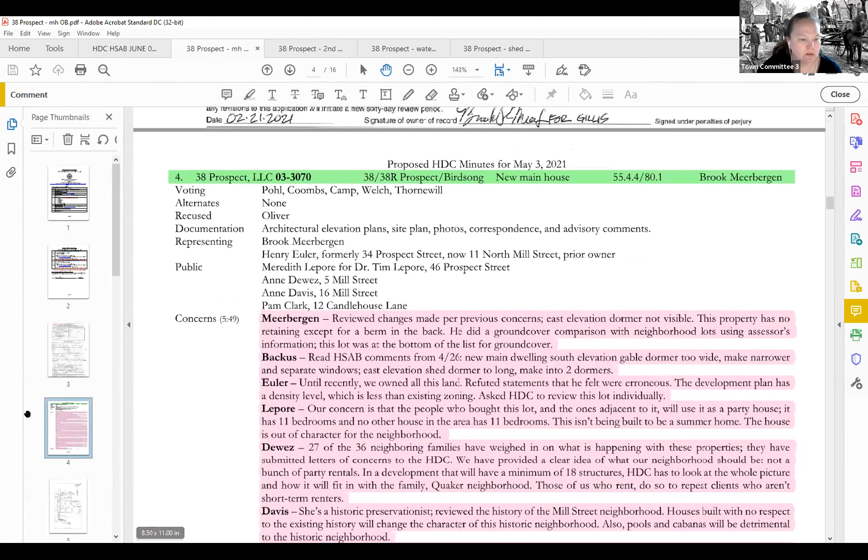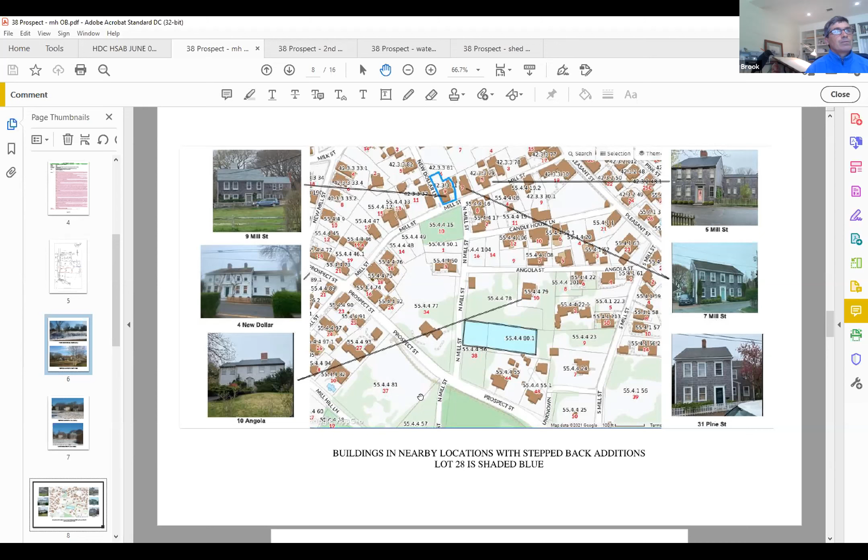Do you want to say anything? I know. Let's see, which one are we on? Are we on the main house? Main house, yeah. Can we just scroll down through the? Yeah, we've already seen all that. Yeah, so.

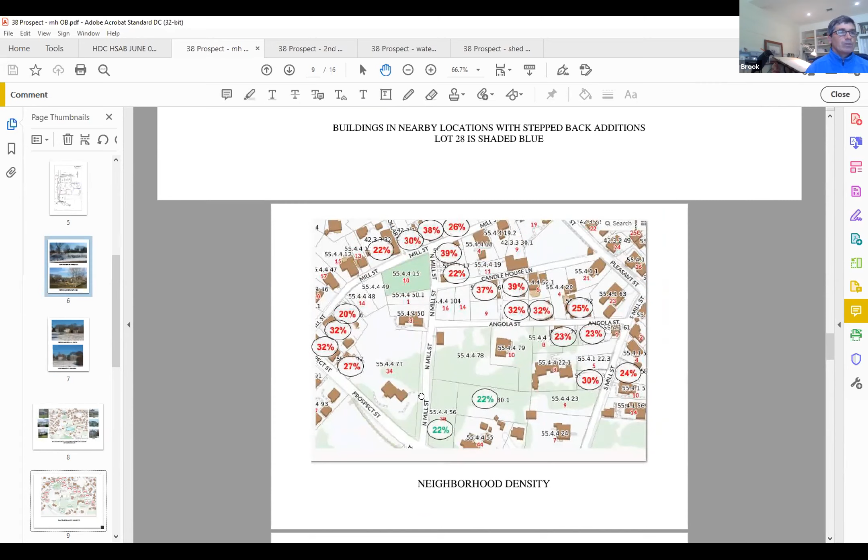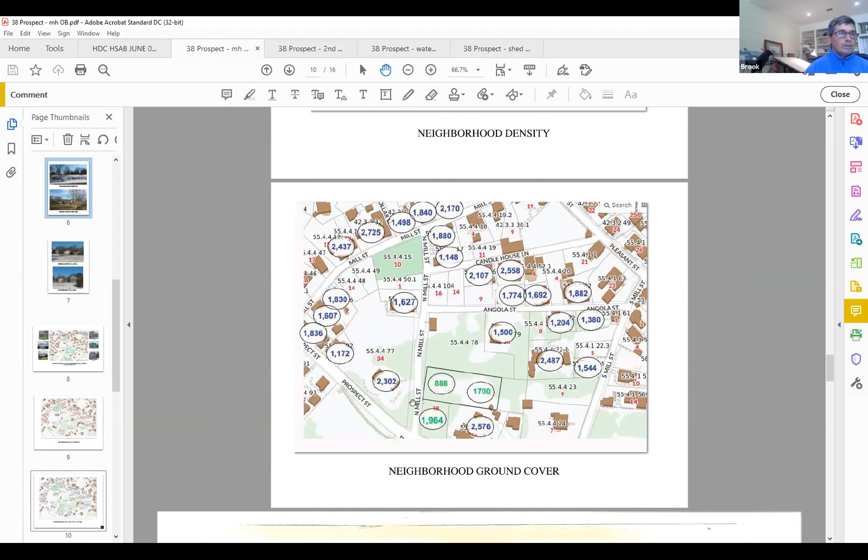You know, at this point it's hard not to look around and say there's so many other examples of what is being proposed here in the neighborhood, that it kind of defies reasonability that we're getting as much pushback as we are on the house. So I'm hoping that the minor revisions that I've made will help appease. As you see, these are the densities and the square footages, and they're all well within the realm of what is around this parcel, on a larger lot.

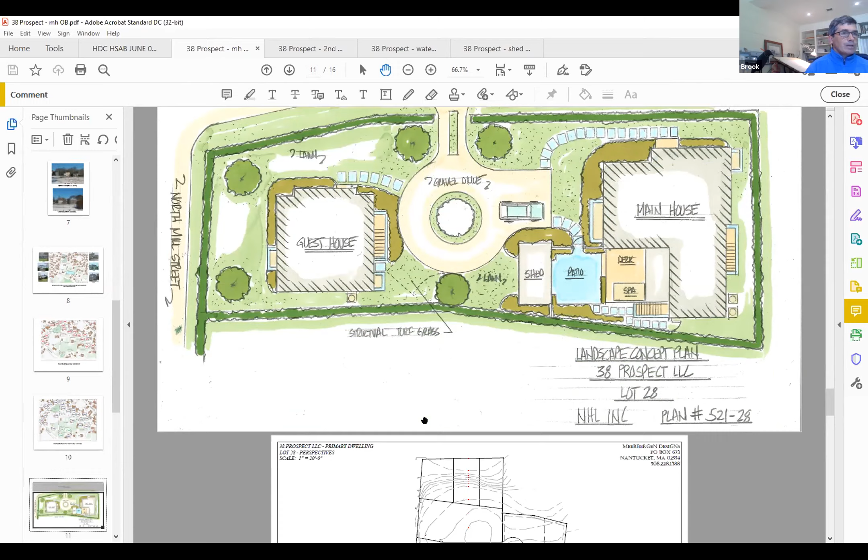So anyway, I included a landscape plan that I think is definitely artistically a little bit more appealing than the CAD site plan that I had provided before. So hopefully that helps paint a better picture. And I think, let's see if we keep going.

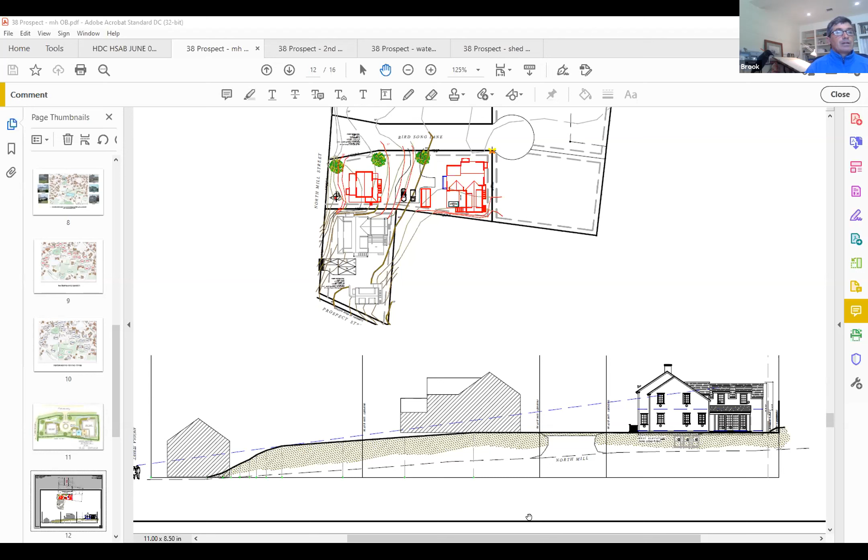I think one of the things that had been requested at the last HDC meeting was that the 60-foot topo line be maintained. So what I did is I ran the 61 and the 62 behind the house, and you can see there's just like a berming effect on the right-hand side. What you see on the bottom is a topo through the entire parcel, all those parcels from Angola all the way up to this house.

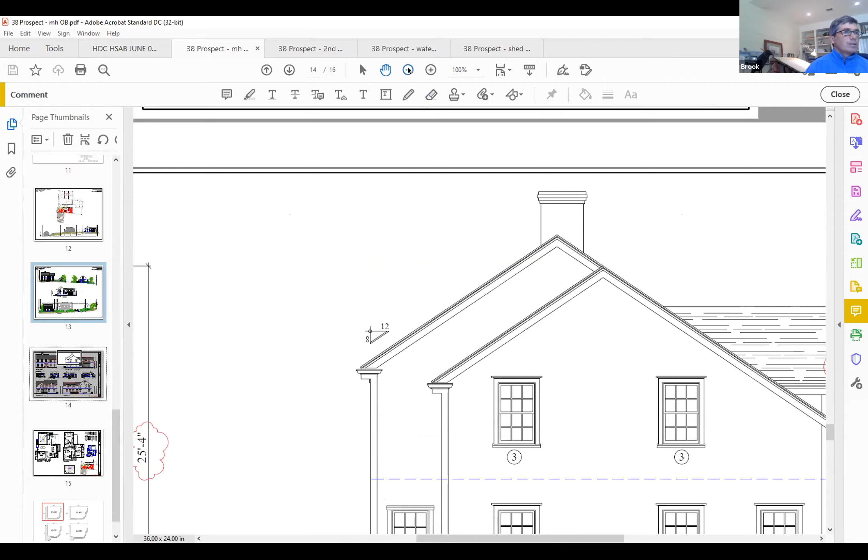And again, I think that it should be fairly evident. Yeah, I guess, again, this should be all self-explanatory. And then the next page, you'll see the changes that I made for the HDC.

You'll see on the north elevation, the height was dropped on both the left and the right. There is a plate height shift. This is now a mud sill, before it wasn't. And the dormers on the west elevation were split, where before it was one dormer. The same is true for the east elevation. Again, that was an HDC request.

Moved the stair around the back side, which is on the east side now. It was on the west side, the stairs to the basement. And made the gable dormer a little bit smaller, pulled in the cheek wall a little bit, dropped that, pushed the windows apart to give it a little bit more balance.

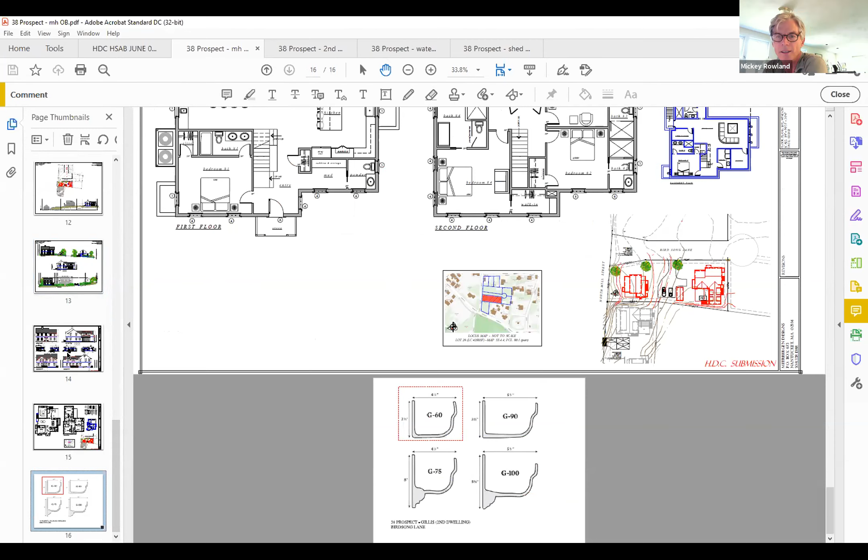And instead of 3/3s, which Diane Coombs didn't like, they are now 6/6s in the bedroom. So I think, oh, and I might add that what you see is my 24/36 format, so everything fits on one page. I mean, I think that kind of underscores just how small this building is. And I guess that's it. Thank you.

Okay, thank you, Brook. I think one question I have, the east, is it the east elevation, west elevation? How visible is that rear part of the west elevation? I think without the second dwelling there, I think it would be somewhat visible. There is the shed that blocks that view as well. So if you go back to the site plan, yep, up one more, yep.

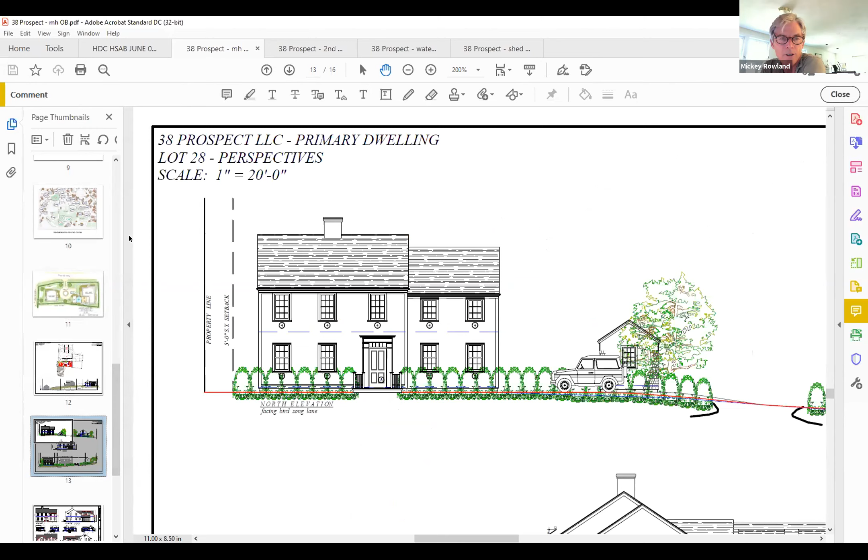And you'll see that there's that shed that acts to block that view. Maybe you'll catch a glimpse from Birdsong Lane at an angle and catch part of that back porch. But I think that shed helps, and then that second dwelling also helps too, assuming that gets passed in its form.

What about looking, Holly, could you go back to that? Rick, what about looking like from Prospect? Say you're on the bike path on Prospect, and you look between the barn, the shed, and the neighboring building, looking through at an angle. Will you see like the rear dormer? I can't tell by the topos if that's all wooded?

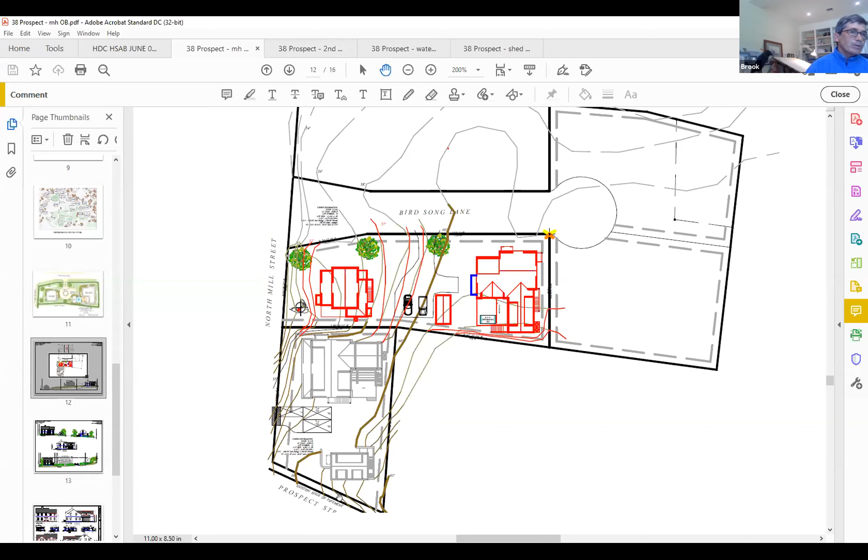Is it really? Yeah, so that's Fraker's property, and Fraker's property sits up above the bike path. So I think you're going to probably see next to nothing. I mean, you'll probably see the roof of the building, but I don't think you'll see that first floor for sure, because I think it's about 8 feet below where the... if you zoom in, you'll see this.

There's a 65, right? Topo line, and keep going down. Yeah, I'm more concerned about the second floor dormers, to be honest with you. That gable dormer. Yeah, and the others, they're pretty... well, if you don't like it, then you don't like it. I don't think it's going to be as visible, just because you've got Fraker's building there, and you've got the new construction that's going on lot 29.

So plus we got the lot itself that Fraker's is on is up about 7 to 8 feet, and the Prospect bike path is below Fraker's. Like if you ride by there, you're looking up at Fraker's front door. Okay, thanks, Rick. Thank you.

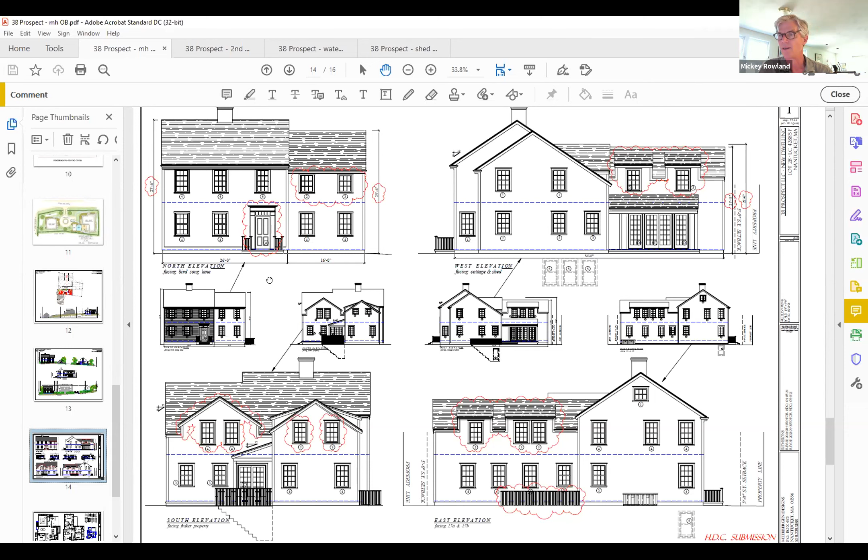Yep, I agree, I think it would look better. And dare I actually say this, because I work in a house that has 12 over 12 and 9 over 9 and what have you, you could actually do a mix. The main part of the house could just be 12 over 12s and then the rest of it could be 9 over 9s.

Give it a little look and see how it looks. All right, any other comments on this house, the main house?

Moving on to the second dwelling.

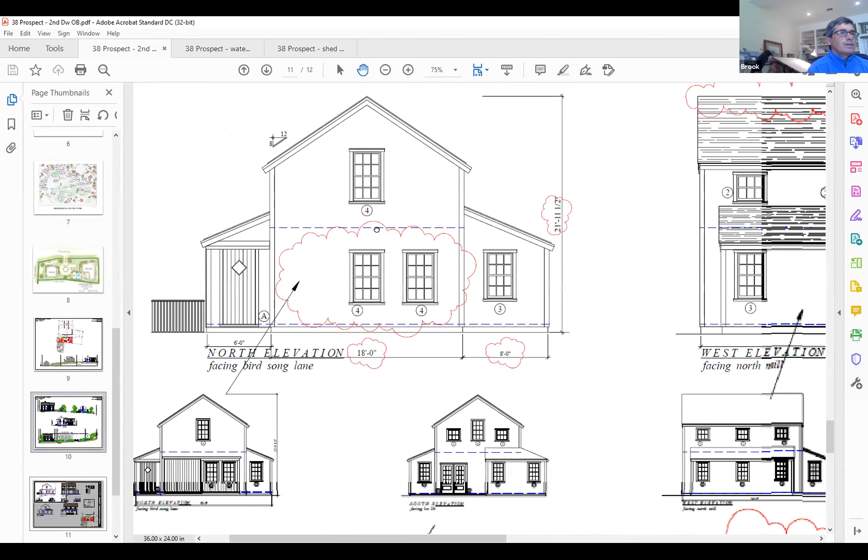So for this one, the stylized garage entry was abandoned. The building was brought down—I can't remember how much, but it's below 22 feet now. The front windows, everything was simplified, I think, in that respect.

Yeah, most of these were just HDC concerns. This is a simple building. I think it could have been a barn that was added to over time. So I've done, I think, what was asked in that respect.

Angus? I like the notion of it being a barn that was then changed over to a living space with stuff added on to it, and that's what it looks like. I think it works—it works with the house. I appreciate the height going down.

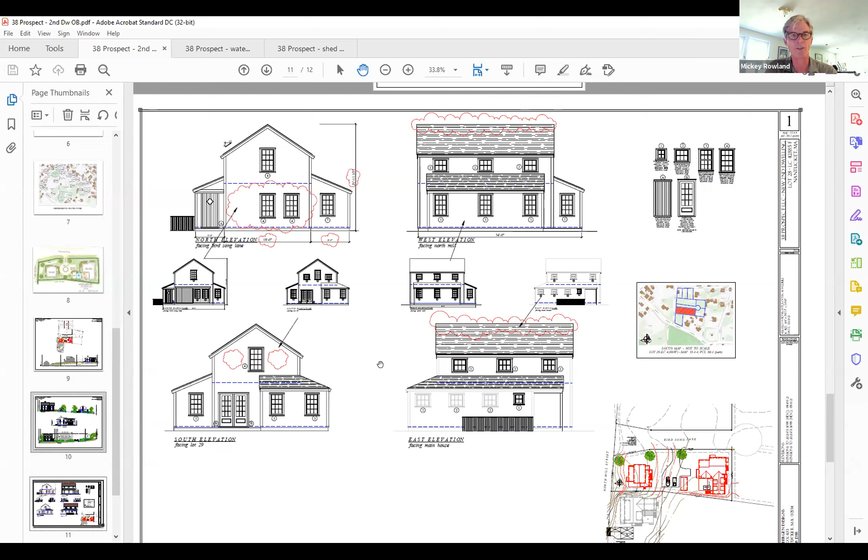Okay, I'm going to say something similar to what I said on the last one. What about 12 over 12 windows? I think that might also kind of give it that barny old feel. Yeah, I'm game. I'd be happy with that recommendation.

And the other one—that north elevation where there's sort of that blank spot to the left. I know you've got a stair in that corner. What if you move those two windows, just sort of center them within that wall? Can you squeeze them in there and still make the stair work?

No—can we do it? What about if you just did a 3 over 3? Because if it was a barn, they might have had windows randomly stuck in places at different times. Yeah, actually Holly, would you mind scrolling to my floor plan so I can answer that question?

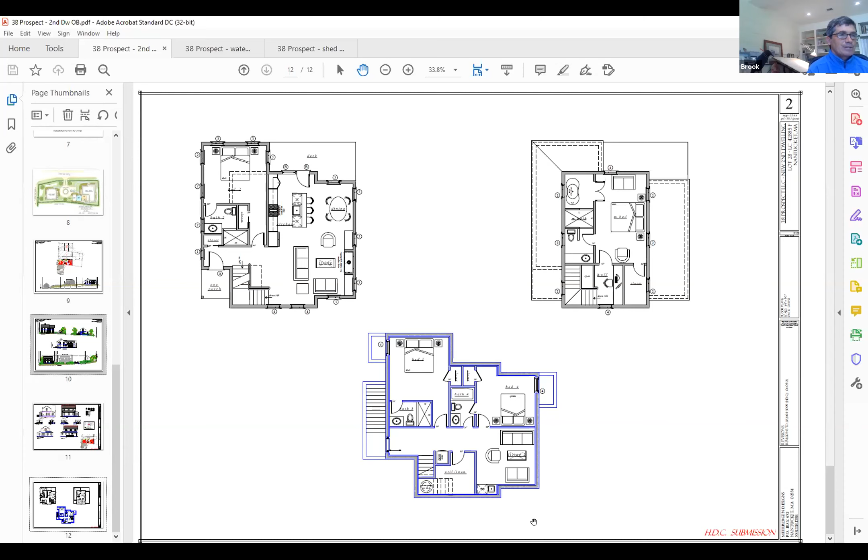Yeah, I think it might be possible to have like a little window there, either a 3 over 3, or we could do like a little 4-light window, kind of like what's in the powder room. Yeah, it could even sit on that landing part of the stairs.

And you know, I'm definitely interested in that. Just the way things have been going at the HDC, I have no idea what's going to fly, but yeah, I definitely would entertain that.

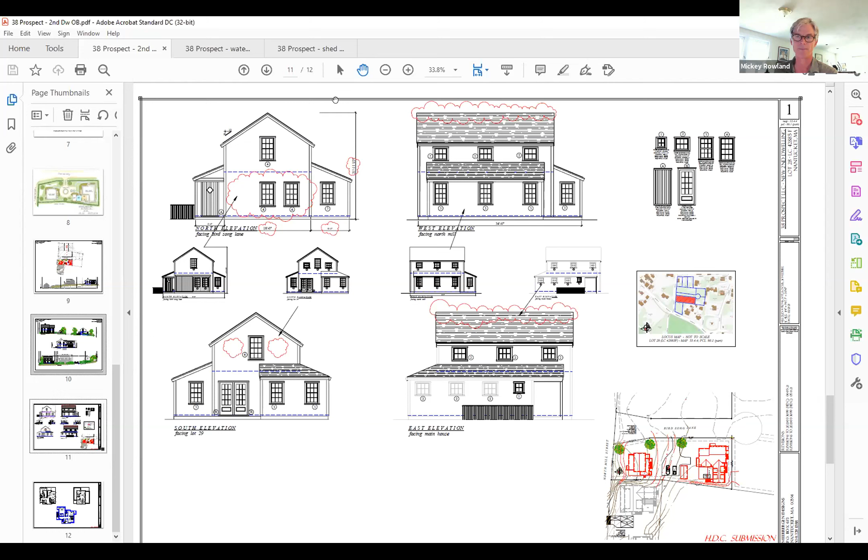So if you do end up going to 12 over 12s, then it would be more like a 9-light, which would have that more barn type of quality too. So I think that's a good suggestion, Jason.

All right, on to the shed.

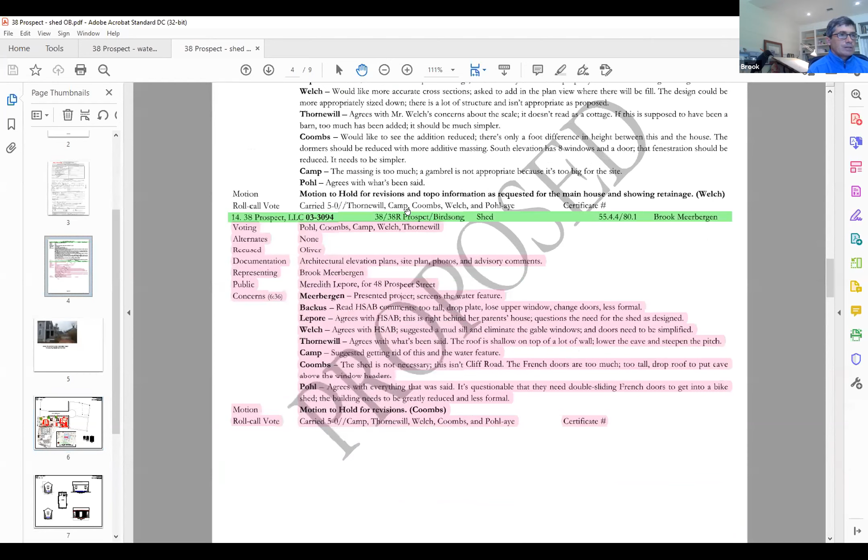Oh, that's old. Oh, okay. What happened is this has now been tracking with the application, and so what you're looking at is an old site plan, the old water feature situation.

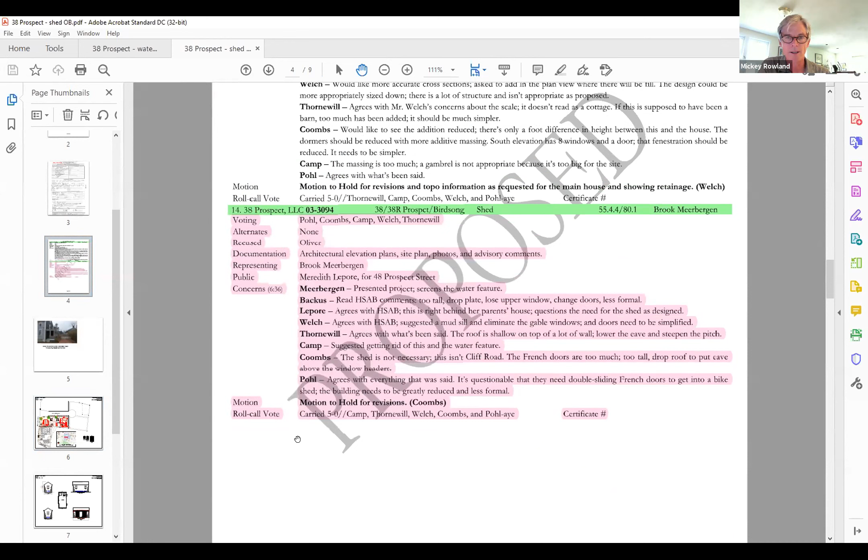But the shed, I think at the last HDC meeting, almost everybody was okay with it. So it's just running with the rest of the plans.

There was a comment from someone that maybe it felt a little long, and that's my only comment, could it be shortened a little bit? I'm open to that. I think its length certainly helps obscure the west elevation of the house, but I think knocking 2 feet off of it probably would maybe help the design and wouldn't necessarily hurt visibility.

Angus, do you need to have double hungs in this? Being a shed, it brings me back to the idea of the barn and outbuilding, that there could be, especially on that west elevation, maybe 3 nine-light fixed or awning or hopper windows or something. It seems kind of long to have that blank space in the middle, but it's a shed. I don't see any reason to have 2 double hung windows there.

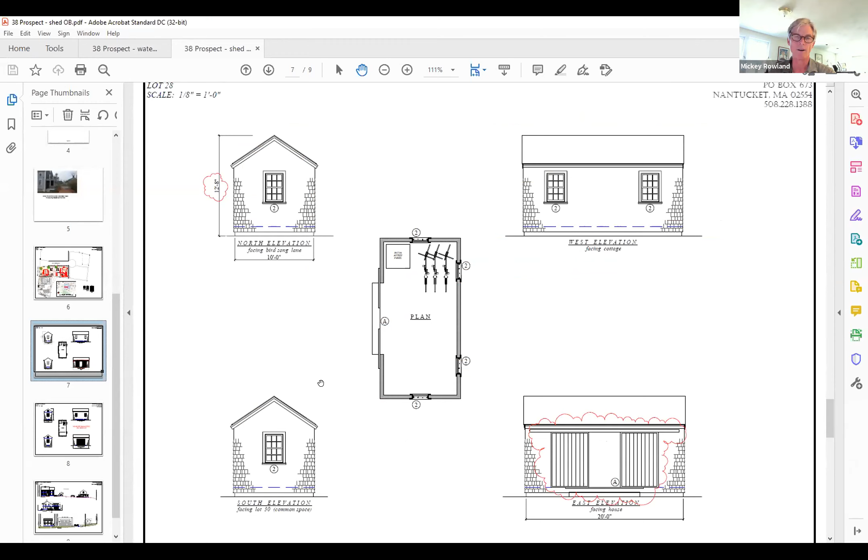So maybe the gables were double hung, and that west elevation could have a couple or like 3 smaller windows. Yeah, I'm amenable.

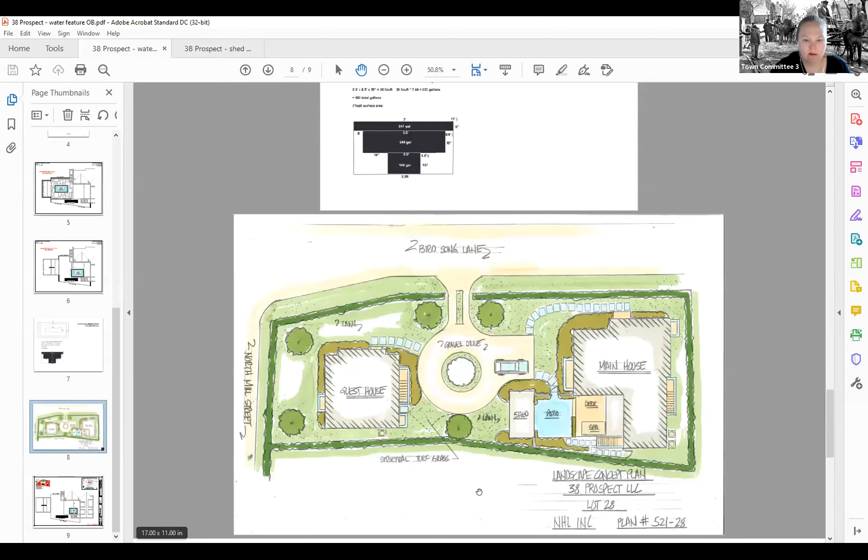Jason, did you have any comments? Okay. And then on to the really fun one, the water feature. You're drawing a crowd. This was just to track, right? Well, to track, yeah, the shed. Oh, okay. Your water feature was to track, right?

Well, we've changed some things about it. Yeah, if you keep going down. So I think the shed was supposed to track, the water feature was revisions, so that might have gotten input backwards, maybe. There was a whole lot going on at the meeting. But anyway, the water feature has been made much smaller, and it has been tucked further back behind the building.

And it's in the deck, so it's part of the part of, it's not going to be sticking out anywhere where it might be visible. Is that underneath the porch roof, like half? Partially, yes.

Okay, Jason? I'd rather it just go away. I'm not a fan of it in the deck either. I mean, I'm not a fan of them at all, but I just think in the deck is a little unusual too for Nantucket. I know we saw one on Westchester, I think. There might be one other maybe on Hussey, but I just don't think it's appropriate. But that's all I have to say.

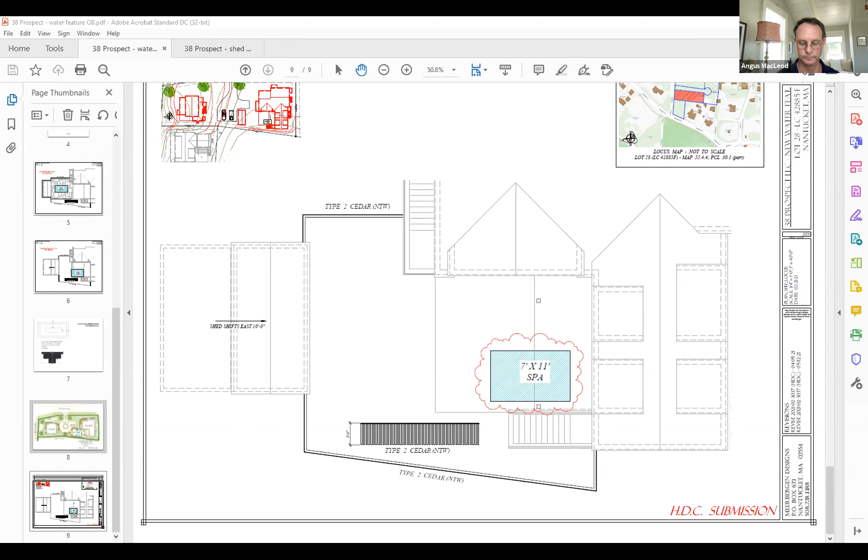A water feature like a koi pond or a little thing like that, I think makes a lot more sense out in the patio than a water feature that's partially under a porch. So I like the reduction in size, but I would prefer to see it more out. I guess the reason it went behind was just to screen it from view, but I have to say, if it were to exist, I would prefer it further out.

Okay, is there anybody else in the public that wants to speak to this particular application? I see a few other names. So maybe not. Okay.

I think you bring up a point about this being not right downtown, on the outskirts on the edge of the OHD, and that's got some merit to it. But in general, I think many of us are still opposed to these kinds of things downtown in the OHD, and this is part of the OHD. So I'm going to just make one comment: pools and oversized water features have an adverse effect on the character of any dense neighborhood due to nighttime reflected light and accentuated sound. These features are especially not appropriate in the OHD. Visibility is one thing, I'm trying to dance around that because I doubt it's visible, but I still don't feel they're appropriate down in the OHD.

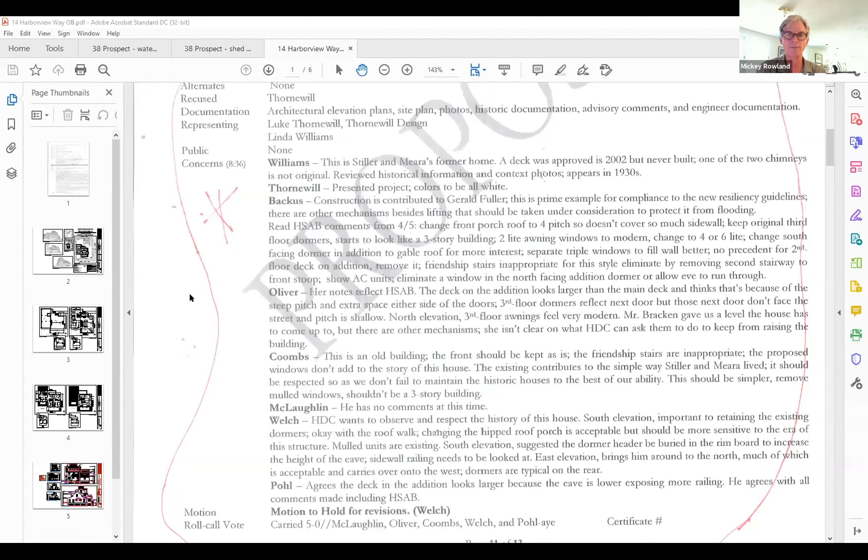So I think unless there's any other comments, we can probably just move on. So on to the next agenda item, 14 Harborview Way.

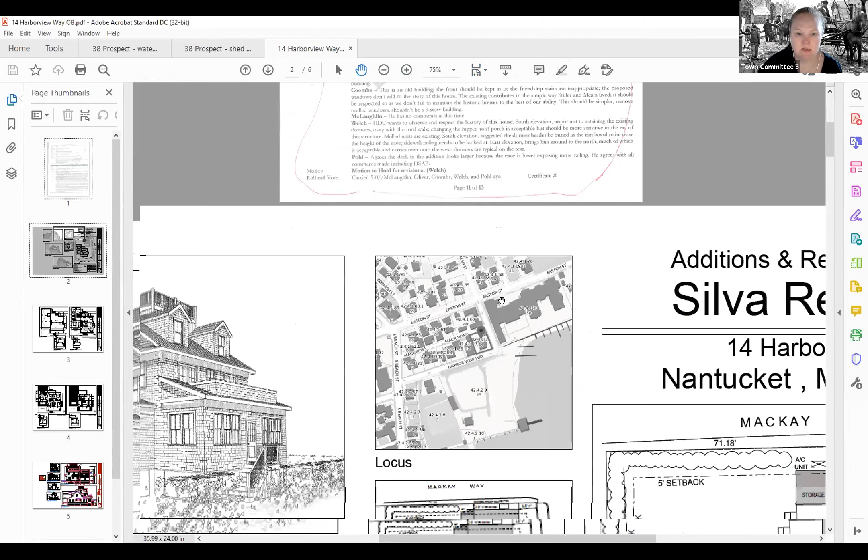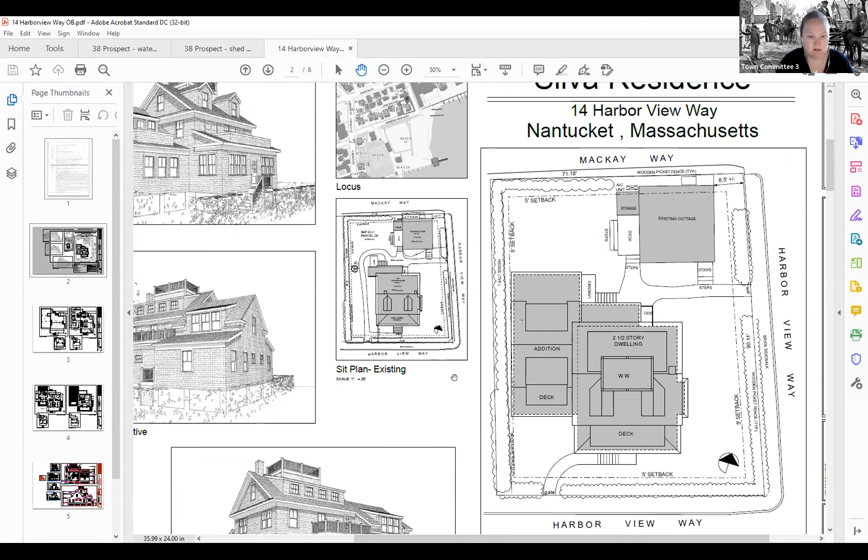So of course I read all the comments, as you can see here. And the biggest thing that I did bring up to them was the fact that this structure is historic, and it's one of the first that's really going to be, should be an example of what could be done for a historic structure being elevated to meet FEMA flood standards. So I'm not too sure what they provided, but here we go.

I don't see Luke or Carrie here, so is there anybody else in the public on this application? Nope.

All right, I've got a few comments, but I'm going to let you guys go first. Brooke, do you have any comments on this one?

You know, it doesn't look markedly different than before. I think it would be helpful if Luke or Carrie were here to kind of summarize some of these things.

The access point on the south elevation from the second floor, that's still a concern. We've got two decks facing outwards. Maybe there are other buildings on the street, the other ones have the same situation where they've got two decks, a deck for each bedroom.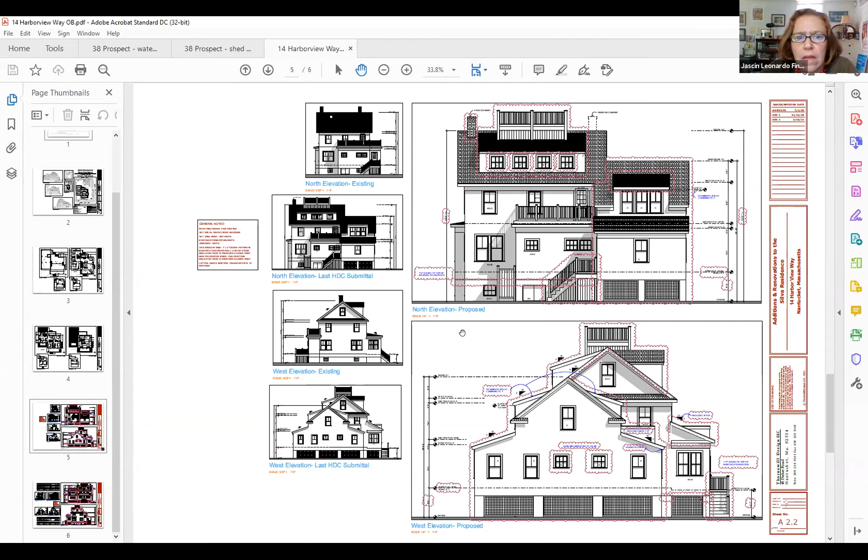Going back to the south, the front door, I know it's existing, but it's a pretty ordinary door. I think this is going to now look like the front door of the house, and they could make it a little bit more attractive, enhance the casing, and maybe go to a different style door. And those are my comments. Anybody else want to add to that or comment?

Jascin? I just also think on the west elevation, the way it looks like dormer on top of dormer on top of dormer, it's like gigantic steps. It's just strange looking to me.

Is this the elevation you're talking about? Yeah, I see what you're saying. It's just too much. You don't even know what the original house looked like - it's just been eaten. The middle dormer is pushed back further so they're not one on top of the other.

Do you see the perspective though? Actually, it's not a dormer on the bottom, it's over the door. I don't know, I think it overly emphasizes the height as well. What is the height? The overall height would be 36.

Let me also point out that they'll be required to go to the zoning board of appeals for that height variance.

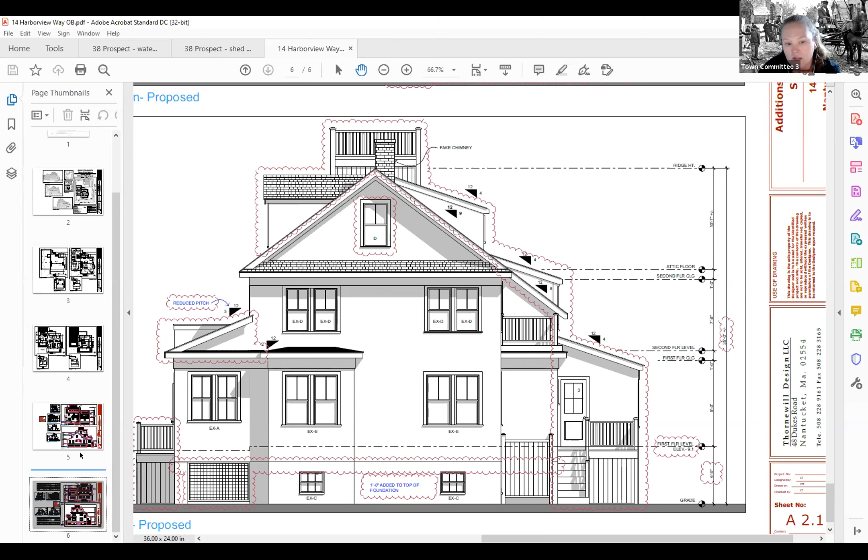Jascin, your comment in the beginning really hit the nail on the head for me. It really obliterates this 1930s historic structure from what it is now. It's really even altering the streetscape. I do understand the applicants provided in their previous submittal a lot of photos of the existing streetscape, but from my perspective that needs to be included with the proposed renderings to really see how it fits in with these other Harborview houses that have been altered over the years. This one is being raised significantly high, but I really do think it's the addition that just wipes out the significance of this 1930s structure.

And the roof walk, the addition of that deck, and the center window stuck in the middle - it's out of scale. 1930s to what? I'm sorry, I just don't have the proper terms to express it. I'm disappointed.

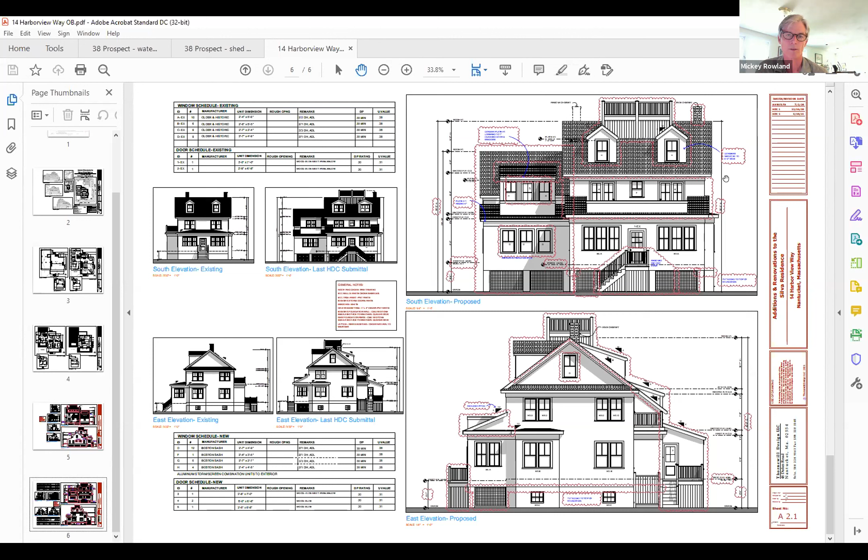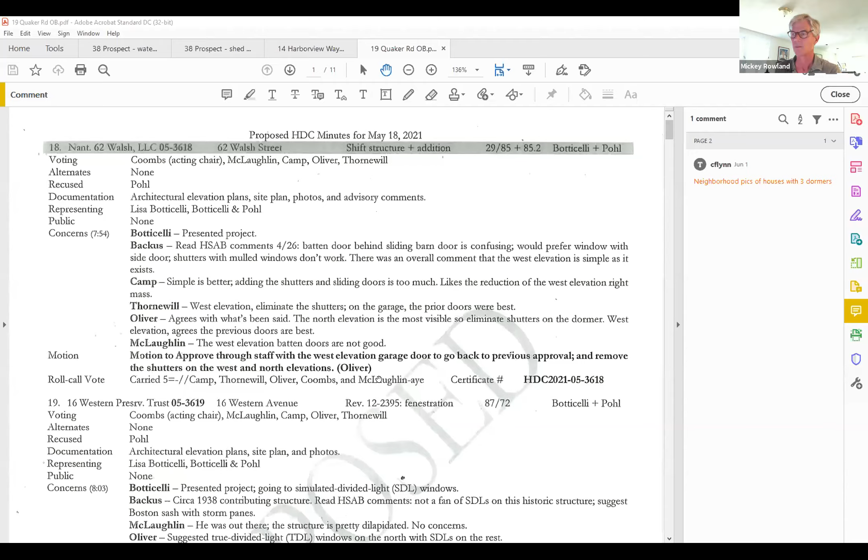So I'm adding the note that these additions essentially obliterate this 1930s structure - too much change and expansion. I think that's good enough. Let's go on.

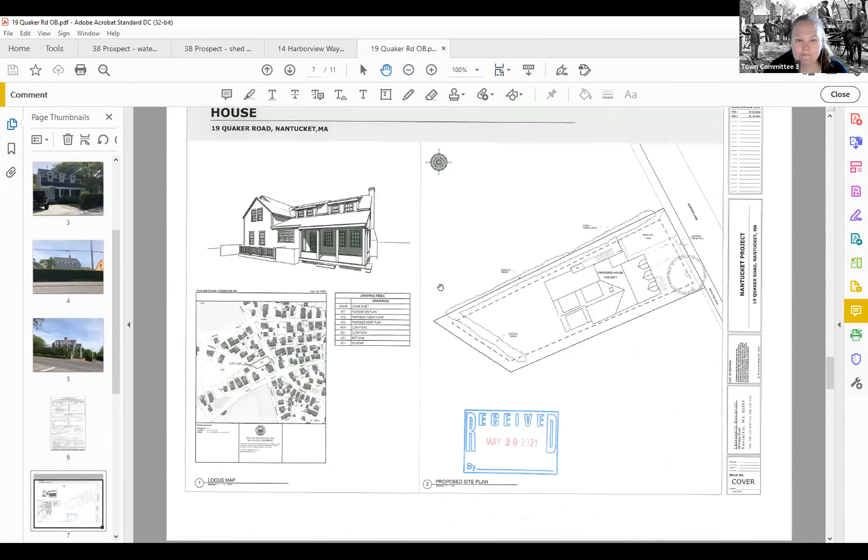So the next one is 19 Quaker Road. Examples of 3 dormers on the roof.

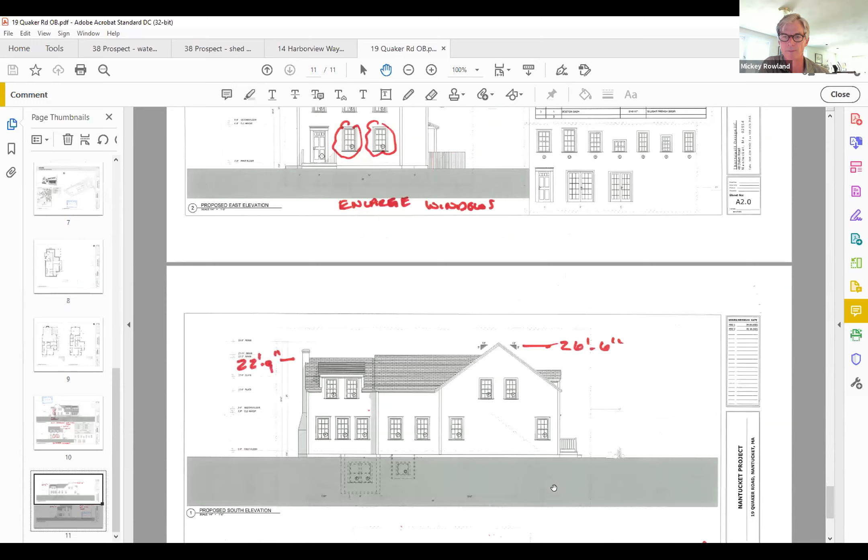So they've made some changes, mostly windows, not too much in the massing from what I can tell. Any comments from you guys? Brooke? Let's see, hang on a second.

My general impressions are that this is a simple building. Let's see, where are we? Okay, so they bought the back of Aloisi's lot, I guess - I think it's maybe even a second dwelling, a second lot. I think they subdivided it. Yeah, all right.

I think it might appear long and large from the sides, but the narrowness of the lot and its proximity to a much larger house to the south, and some density to the north, obscures that concern a bit for me. In terms of the window changes, I guess those must have been things the HDC had requested - we did also, so that works. The height 26.6, I think that's probably in keeping with what's around there - the house right next to him on the corner of Quaker and Milk is definitely bigger than that. So yeah, I actually have no concerns with this building. It's simple, it works, and we're really never going to see the length of it.

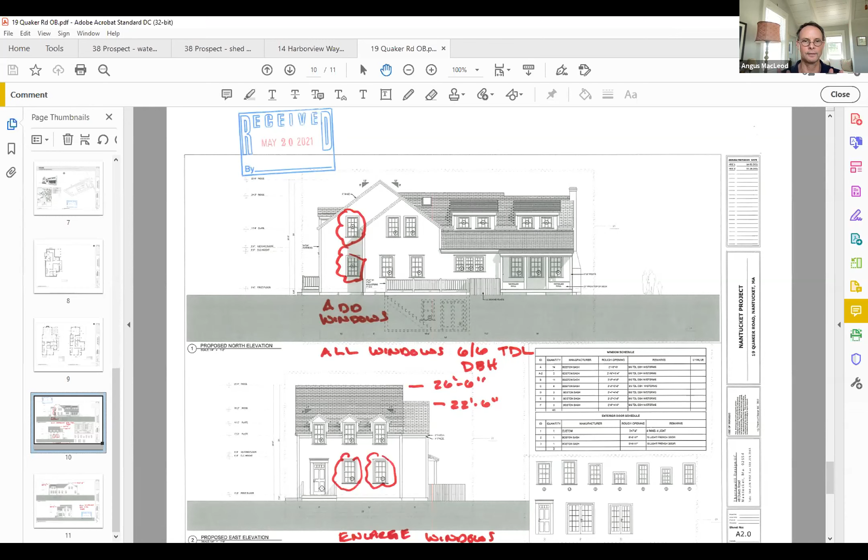I appreciate the first floor windows getting larger, but the second floor windows on that street facade, there's something tediously small about them, and I can't quite place whether it's because there's so much roof above them, or that they really are just small. It's like it's a different scale from the first floor to the second floor.

I don't know whether the dormers need to get bigger, or the roof needs to get smaller, or both, but they seem small for the height of the roof behind them.

That's pretty obvious in the front, but if you look at the profile too, you get this little dormer and then the long roof that comes out above it. Those windows on the dormer are 2 feet 8 inches wide by 4 feet 8 inches tall, so they're not small windows, which is odd because they look it. So it makes you wonder what the scale of the building really is.

Does anybody else notice that it's almost as if you would typically have either thicker trim or a course of shingles on either side? This looks odd to me.

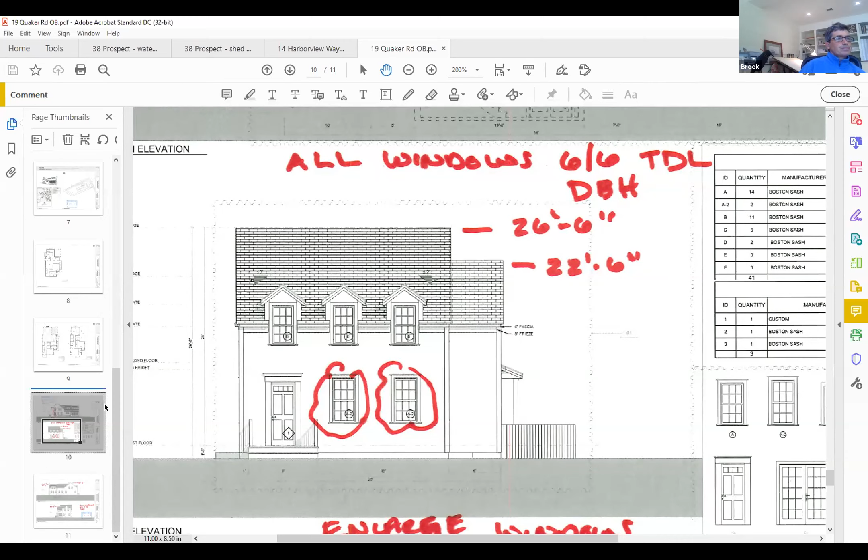Is that because it's sunk in? It's a little tight, and we're often trying to get people to go in the other direction. There's usually too much space on the side of the windows, so I hate to comment too much about that here, but I think you're right. The casing right up against the corner board - do we think that'll look better with a little bit more space? Maybe a shingle band around the whole window?

Well, let's go back to those photos. Let's see what was acceptable.

He doesn't want it. Cottage corners - I kind of like the windows sort of tight in the dormers, not...

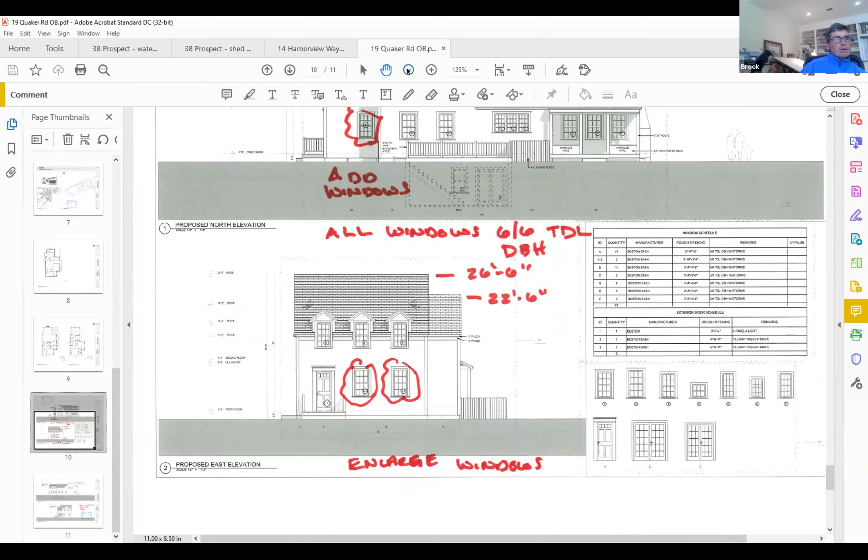So maybe we just leave it at that and just say, just try to get a few inches of shingle between the casing and the corner board. Does that work?

Yeah, I mean, I like it more or less as is. I do think that the dormers could maybe come up a little bit into the roof line, as opposed to being a quarter of it. As Angus said, it's almost more like it's closer to a third or even a half in those photos.

Maybe that's a roof pitch change, like an 8.5:12 would help that. So, yeah, I think actually even just going to an 8 pitch - I think that's not unusual.

So these are 6/6 windows. It's not a Victorian - 9 isn't that steep, but I think 8 might help the concern we're talking about. And maybe raise it so that the lock rail or the meeting rail of the window is more at the break of the dormer to the shingle, or just something to bring it up some. I mean, those are pretty large windows for second floor bedroom windows - it's just because of the roof and the scale of everything around it that they look small.

Well, to me, they look like they're in the right place relative to the eave line. We always want them lining with the meeting rail, which they do. So I'm not sure I'd want to suggest raising them any. That might make them a little too top heavy.

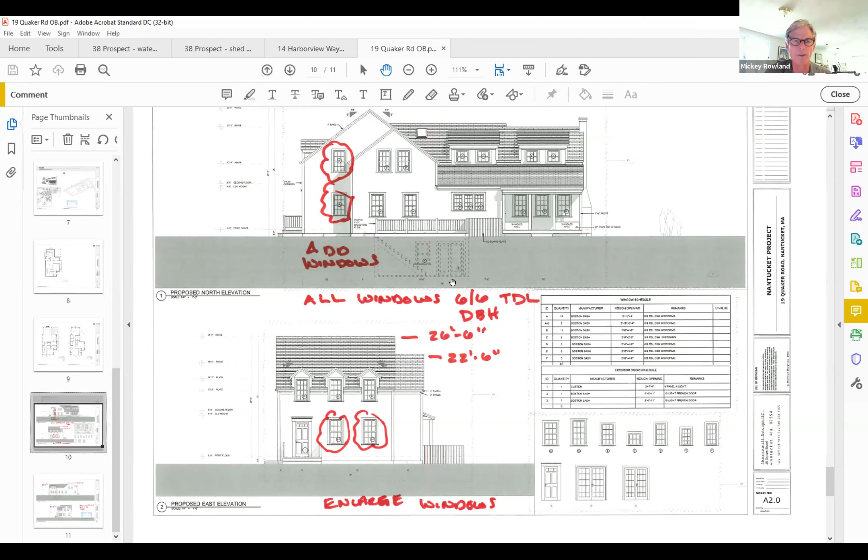Maybe just dropping the pitch will help. I think that's a good idea. I think that'll eliminate some of that roof plane, pull them up, or make them fit into that roof plane a little bit better. I doubt they'll lose much in terms of the program floor area.

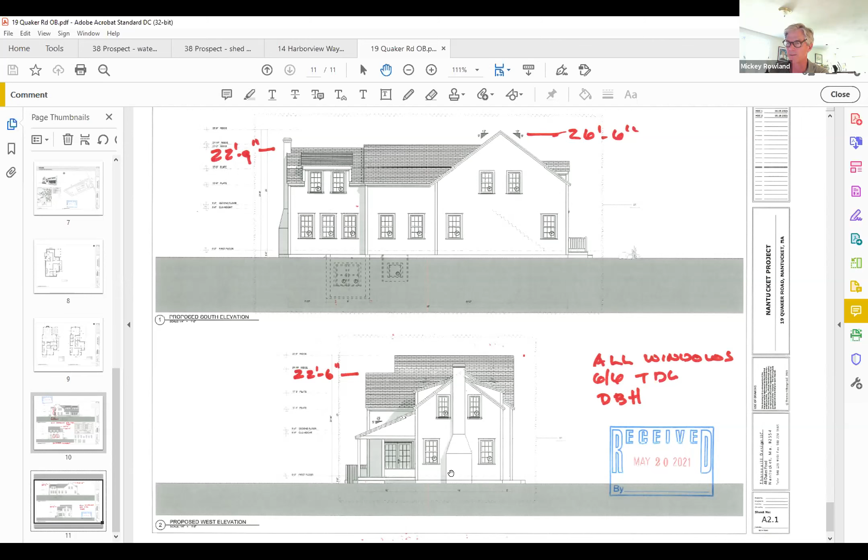My other concerns were, and it's not so evident on this view, but on the south elevation - there we go. The rear wings, the plate's the same height as the main roof mass. I think that the plate for all the rear appendages and the side one, for that matter, should be dropped lower. Make some step there. We're up too high.

And then on that, there's now it's the west elevation below. That's a lot of, it's a 5 pitch on that porch roof, I believe. Is that a 5? You read that? Yeah, that's a 5 pitch.

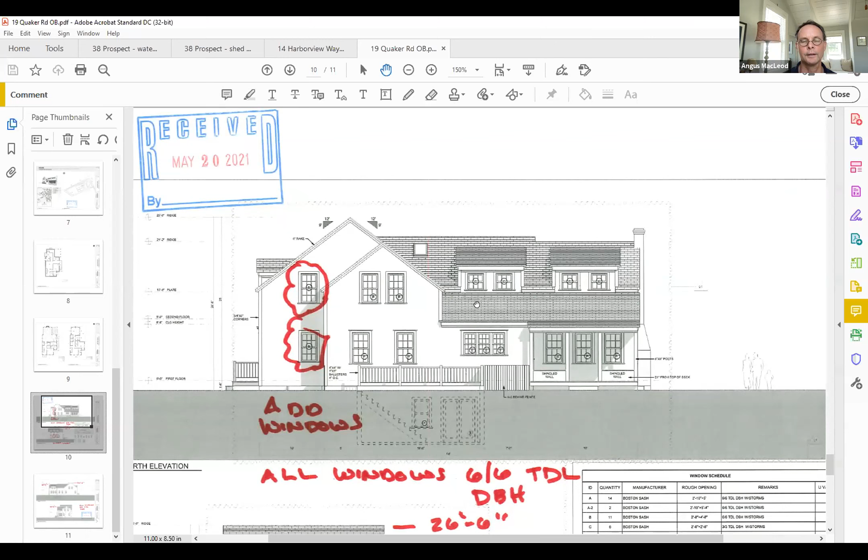And then now if you go to the north elevation - there you go. It's just a lot of roof on the north side. All that, it's one roof plane. I'm not sure I mind the depth of the porch, but it's just a lot of roof. I think if they went to a 4 pitch on that porch roof, it would just eliminate a lot of asphalt. So, those are my comments.

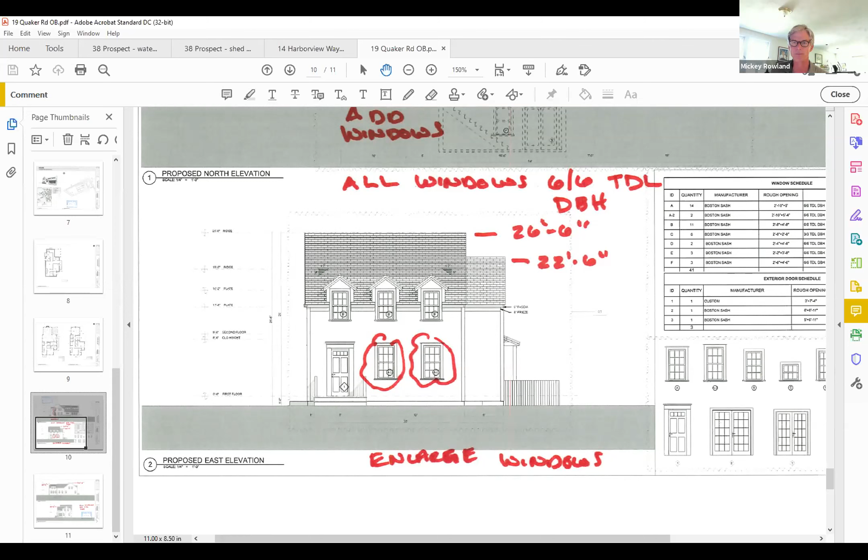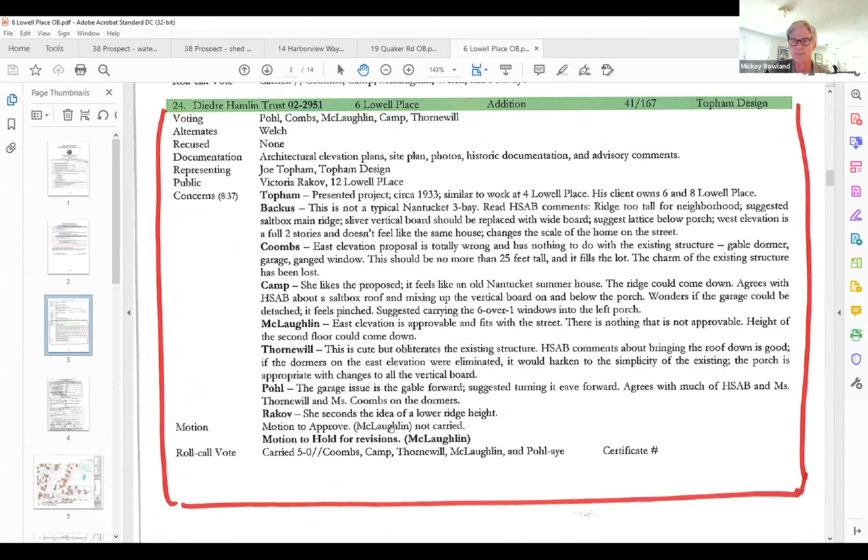Is there anything being addressed about that blank wall facing the street? Yeah, I think Jason mentioned that, so I added a note that there should be a window on that wall. They're not going to want to because that's a shower there, but they can figure that out. Could even be a small window, but I think it's going to look odd. It's just a blank wall.

Is that it? Yep. On to 6 Lowell Place.

Hi, Joe. Hello, everyone. How we doing? Good. How are you? Good.

So this is the second pass at this. Thank you, Ollie, for staying right there. What we did is, we heard your comments about the sunroom, so we toned that down. We did a shingled wall.

The garage element, they really wanted to get some more habitable space. Unfortunately, we had to demolish the structure in 8 Lowell Place. So what they've decided to do is take that garage element, and we're gonna put it on 8 Lowell Place. So we'll be coming back in probably next month with that design.

You also asked us if we could lower the ridge, so I went back to the similar broken salt box roofline element. So it lowered the ridge by about 11 inches, and that also translated to the side massing that got lower.

We are still going to keep the rock face foundation. The one thing that we did do is we had an open bulkhead access, and now that 6 and 8 are owned by one family, they want to have those 2 properties connected. So we have a side door off the back elevation on the south elevation, and we want to link these 2 properties. So what we did is took the outside bulkhead and we put a more conventional Nantucket looking wooden bulkhead access on the front. That's the one kind of tweaky little thing that we did.

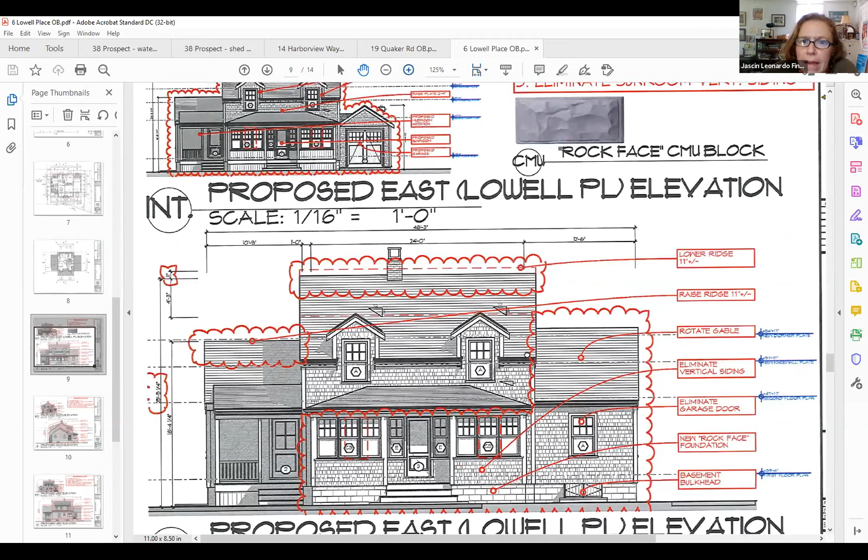Angus, thoughts? Can I just ask what the main mass height is? Because I can't see it. 25 feet 5.

Anything else, Jascin? What is the pitch of the roof, the main roof now? It matches the existing roof, so all we did is raise the front plate. I took the same exact roof pitches and kept them in place, more or less, reused them. So I think it's an 8.

Yeah, I mean, the general feeling of it, I think it feels a bit vertical, but the details of the filled-in porch and the general simplicity of the front feel appropriate for Lowell. I appreciate the garage turning into a room there.

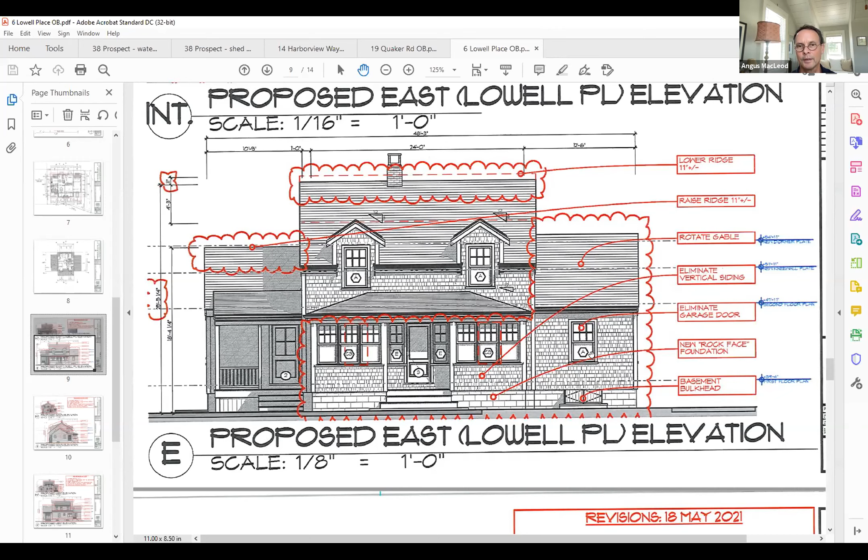I wouldn't have a bulkhead on the front of a house. I would preferably have it in the back, at worst on the side, but not on the front. So I would take that away. If there were a way to lower it any more, it would be appreciated, but the overall impression, I think, is much improved.

Okay, Brooke? What was this before? I don't know that I've seen this application. Existing conditions or the previous submission? No, the previous building—I mean the historic structure itself. That they're not in here.

I shared them with Mickey. I'm trying to—do you want me to send them to Holly really quickly? It might be, let me go ahead and see if I can pull them up. All right, meantime, first one wins.

On that note, Joe, since this is a historic structure, just like I asked for the other Lowell Place architect, I think it's really important from a context perspective to show the existing elevations of this historic structure and how it's being adapted on the plans, if at all possible. Obviously on a second sheet you're not going to be able to fit it all in, but that would be my comment. On the two foot by three foot drawings, it has everything.

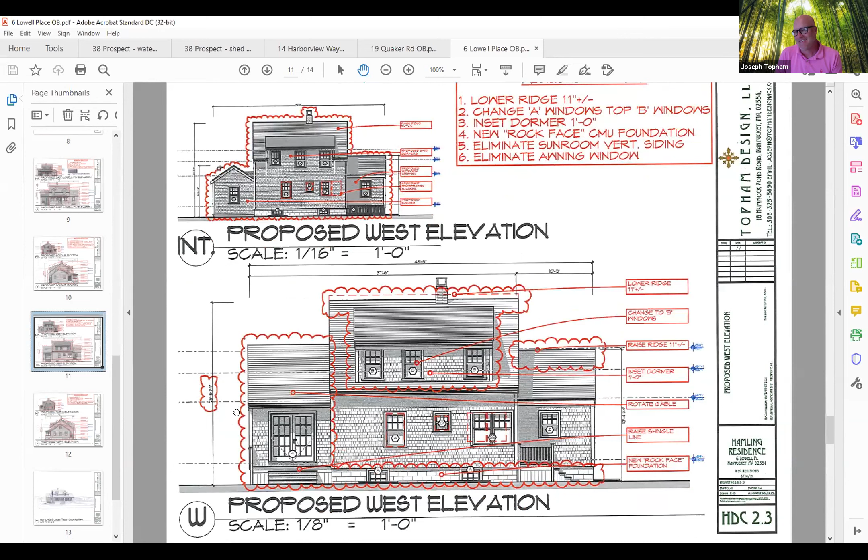Hang on. Gotta love the background. Oh, thank you, I'm always trying to find different ones. I was thinking about it in the perspective, but yours as well. Is that bamboo? Yeah, it's actually a bike trail I want to go try.

Holly, I've got this on my screen. If you can let me share, I can. Okay, and Holly, it's in your inbox. Can you see that?

Okay, all right, so this is definitely a significant change, like that front plate is moving up. Correct. All right, right now, Brooke, I can barely stand up on the second floor.

The bathroom—you would even have to turn sideways. It's just, it doesn't work. What about me though, Joe? No, it wouldn't work for you. No, Brenda Johnson, who works in my office, she even had to duck.

The sink is on the floor. That's actually—the sink is sitting on a chair right now. Yeah, it's just in really bad shape. And they have three daughters, so they're trying to spend more time there. I appreciate that you're maintaining the salt box that appears to exist.

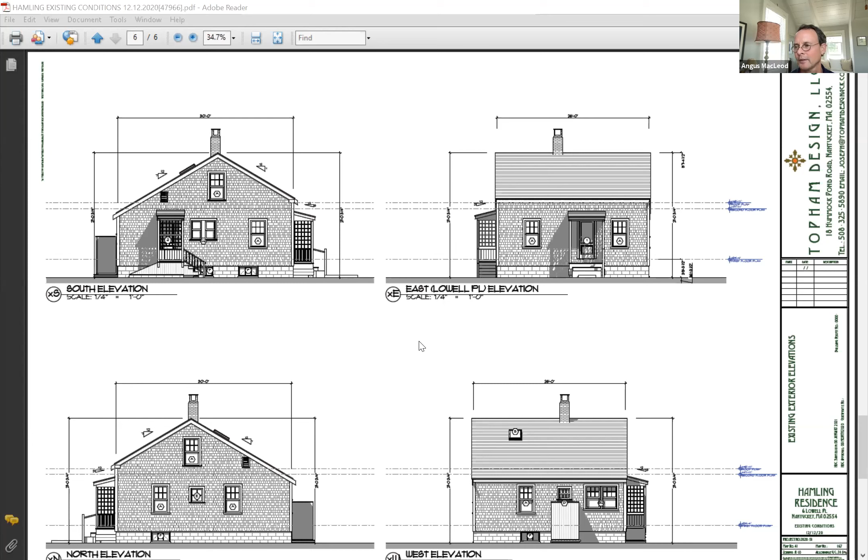It does look like the roof pitch of the existing structure is shallower than what is being proposed. Not sure if you could attractively make this roof pitch shallower without messing with some of the other features, but if the rest of the board has few concerns, then it's not an issue I'd press. I think you saw that.

The pitch that's proposed does look a bit steeper, and if it could stay shallower, I think that would help the height issues. Maybe what is proposed is an 8 pitch and this is looking like a 7 pitch for the as-built. It's actually like a 7.5.

It's kind of in the middle. I don't know if it was a point of sag or something, but I can go double check it. It worked out more or less, we just made it a 7. But yeah, looking at the south elevation, it looks like it gets steeper, further and further away. It's not a parallel line. No, it's not.

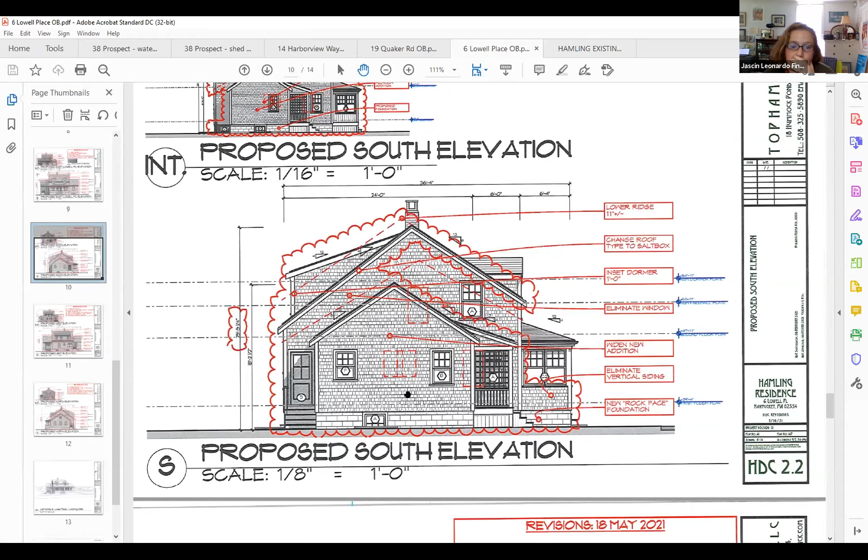Yeah, I think as a nod to what was there, if there was a way to make the new roof pitch somehow closer to what was existing, I think it would be a nice nod to what was there.

Okay, Holly, can you show the front facade again? I don't know if others would agree with me, Joe, so. Brooke - no, I think everyone's leaning with you.

Yeah, I think that's a good point, that the shallower roof pitch might also help those gable dormers like it did on the same issue as on the last house. So I think that's a good idea to try to get it just a little bit shallower.

Okay, and I'll carry that out with the rest of the gables. Is there a way to bring down the roof on that family room piece that's replacing the garage now? Well, I think if we go to a 7 pitch, it will bring that down about a foot.

Okay, 1'3". And I have a really strange request - Holly, can you keep going through the different elevations? Are you keeping - I know this is going to sound strange - but the porches that exist now that have that lattice, are you keeping it on one? Is that what I'm seeing?

Yes. Okay, yep, it got a little bit wider. Again, that's just like quintessential 20s, 30s, and that's another thing that really bothers me that we're losing on so many houses - those little side entry porches that are roughly boxed in to give you a little dry entry area, but also that trellising that exists, and I think that's important, especially on those bungalows.

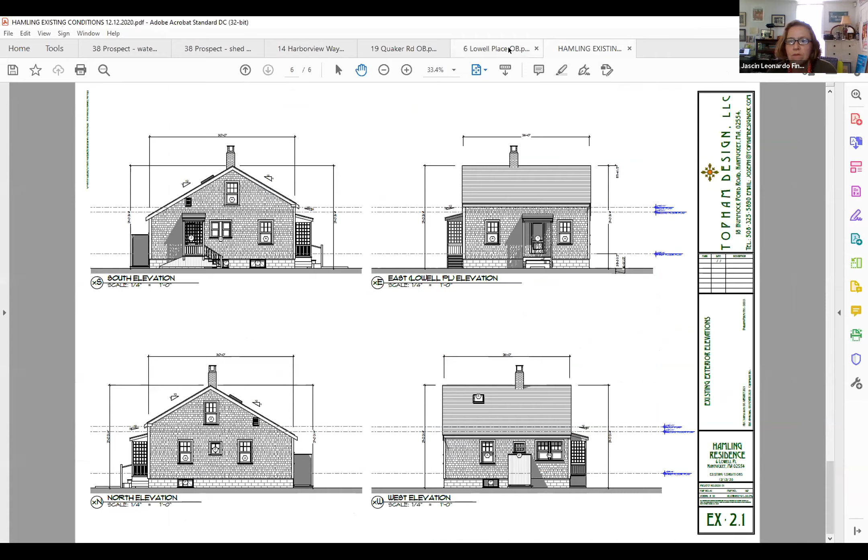Agreed. So the other thing is, and I don't know, you weren't on the last call, but the rock face concrete block - yeah, I saw that. So we've actually found a source, and I did it next door at 4 Lowell Place and they worked out great. Yeah, because it's like what North Liberty has a few of. There's a gentleman in Chicago and he makes three a day.

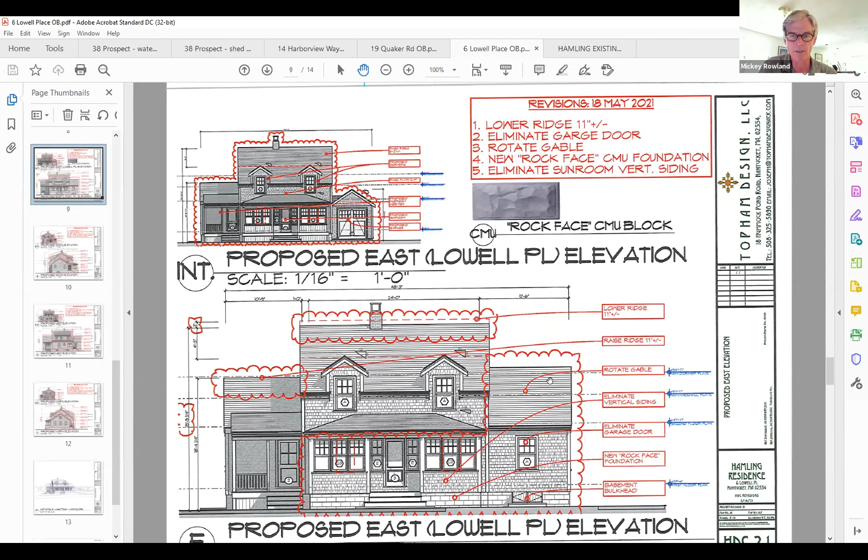I love it, no I'm not knocking it. I imported somebody where I work to come and redo our roof because it's concrete with asbestos fibers, and he's the only one in the country who knows how to coat them properly. He found this, or it was his grandfather's - I forget, it was a crazy story. Anyway, someone had it in his family, so he started doing the business. So yeah, it's great.

All right, so I'm going to agree with pretty much what's all been said. I think, speaking of that northern gable right there, you can see it - maybe you could drop the plate a little bit, Joe, and that would bring things down.

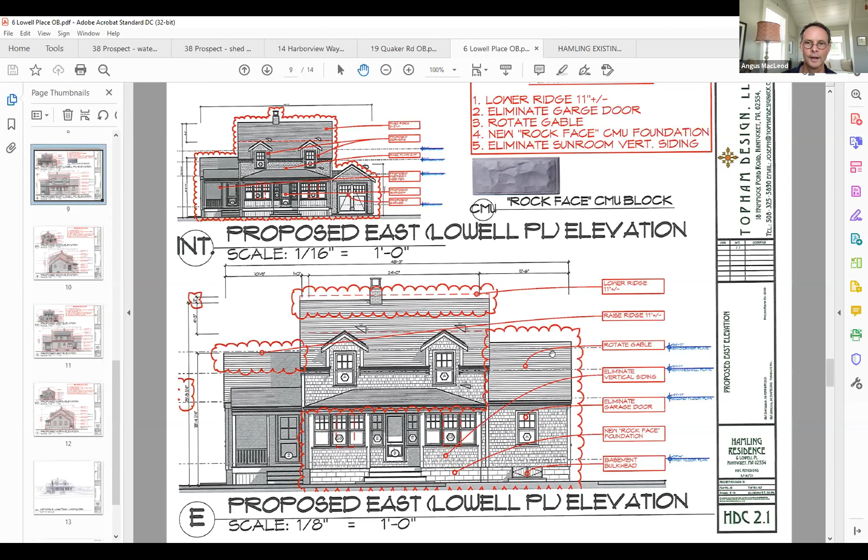It's just a one-story room. Okay, maybe make it a little tighter down to the window casing. I agree with that, Mickey. I think if the frieze could come down to the head casing of the window, and then we got the 7 pitch or whatever pitch is the original pitch, it would help.

And I think it would tie in the porches and that new sunroom element, have them all the same height. That's a good catch, thank you, Mickey.

Yeah, and speaking of the porch, I might suggest, and I don't know how the rest feel, but not to do the concrete block underneath the porch, because it's such a solid look - porches traditionally didn't have solid foundations, and then they were filled in. But I'd almost rather see board or lattice underneath that porch, just to differentiate it.

Would you mind if I did a concrete foundation and then we did a wood element on the front of it to cover it?

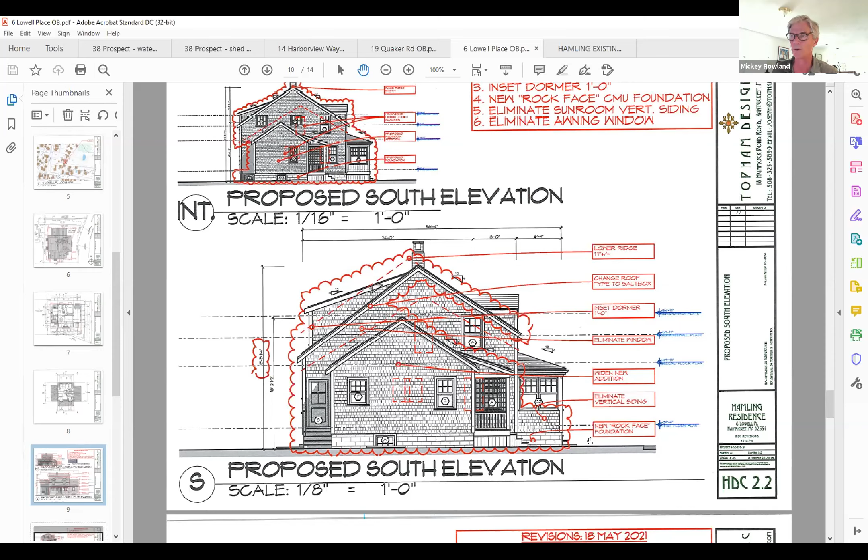Not as long as you can't see the foundation. That's fine, it looks like wood. It is wood. We're trying to get every square inch out of this house, so to speak. And that basement space would be beneficial to the family.

I would try to continue like in one of your earlier proposals, you had the posts, you know, just don't go corner to corner with the boards. Yeah, right there, look. Okay, so have that kind of a recessed infill kind of a board.

My only other comment was the same thing Angus had said. I really don't think the Bilco should go on the front of the building. I know it's not a real Bilco, it's probably wood. But we just don't like to see those on the front of the building. That one I'm going to struggle with. I looked myself, I don't know where you can put it.

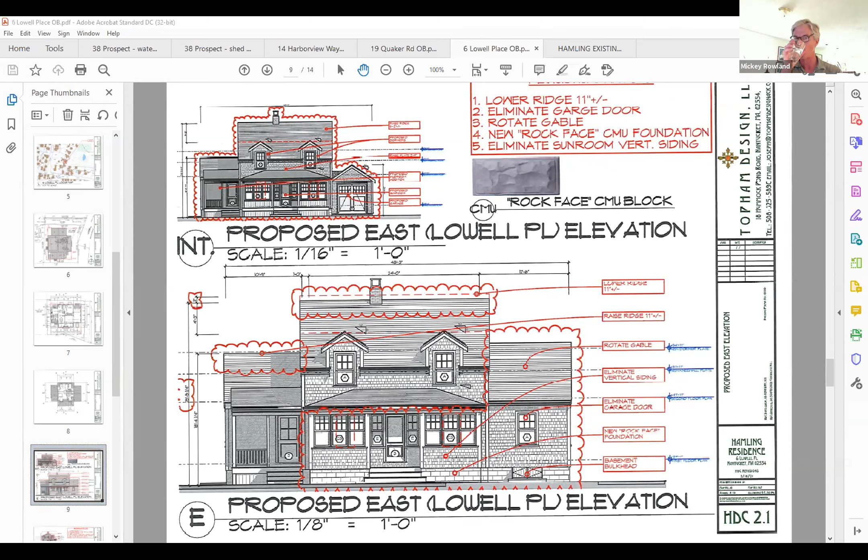So, any other comments about this one from anyone? I guess not. I think we're good, Joe. Thanks, okay, thank you very much. Take care everyone, thank you Joe.

And then on to 8 New Mill Street.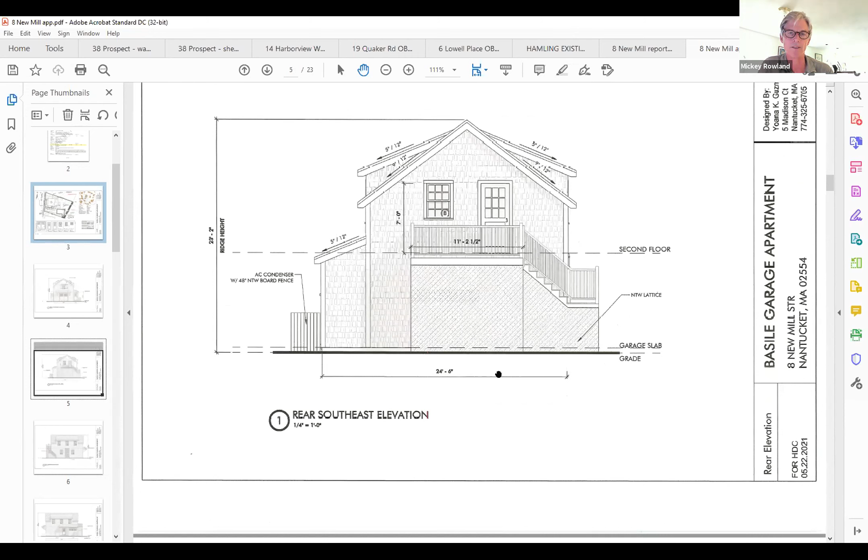This is another one where to me there just weren't enough changes. It's looking a lot like the last submission with a little bit of... I thought the other version was 12/12. Well, that was the original one. Then there was one just before this. Oh, it looks, I think, basically the exact same massing, but they've changed some windows.

Maybe something in the back changed too. Since we don't have the previous submission, it's hard to tell, but I think the massing is exactly the same.

Anybody want to go in on this? It'd be great to see the proposed, the iterations of it. I found it, but I've lost it. It's hard to go back and find old proposals.

So our concern was it being too high, and something about the stair being exposed, and maybe there being an option for splitting the stair to get the egress. Go up to the HDC comments, sorry, Holly. And you can see what we said right there.

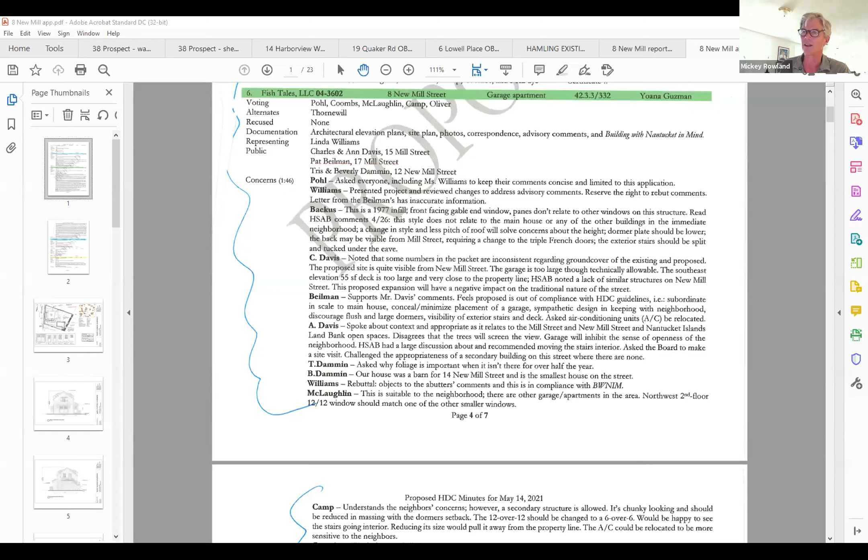This is the infill front facing gable. HSAB comments: this style does not relate to the main house or other buildings in the immediate neighborhood. It changed in style, less roof pitch. So this all relates to the original submission, not the more recent one.

Let me read what I had said, what I was thinking of saying. First of all, there are very few changes to the proposed plans. The massing is still a concern. Small barns and outbuildings were not uncommon downtown, but generally had narrower proportions. Reducing the width by a couple of feet would make a big difference in the proportion of the front facade to give it the appearance of an outbuilding.

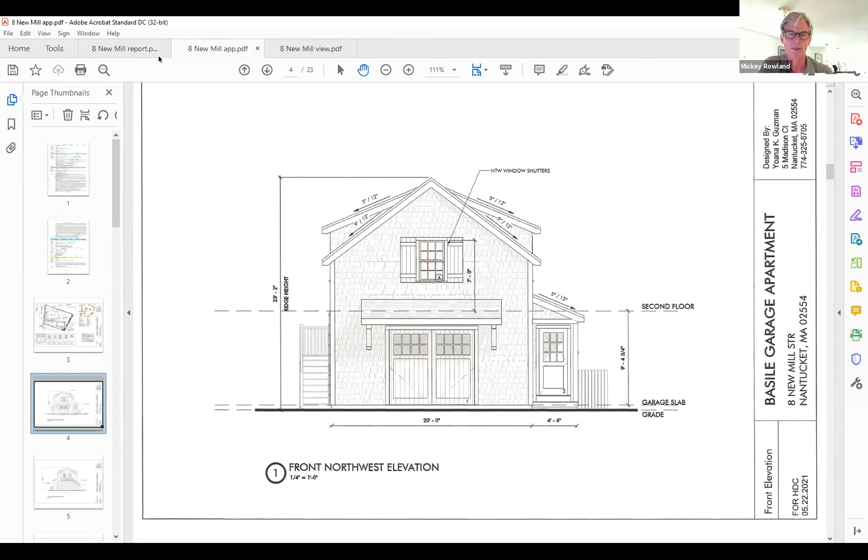This will cramp the floor plan, but it's doable and not the primary concern for the HDC. Reducing the width will lower the height. Other changes to make it feel like a traditional outbuilding or barn would be 12/12 windows or a 9 or 12 light sash, more asymmetrical fenestration. Change the garage doors to a sliding batten style door and move it to one side. Remove the door hood on the garage roof, and then break up the shed dormers on the sides into a couple of shorter ones.

So I think it's still an issue of the proportions. It just looks like a garage with an apartment over it to me. I think I saw somewhere in the HDC comments, 'too chunky.' It is too chunky. I think there actually was a 12/12 on another elevation - was that the original plan? The original had 12/12.

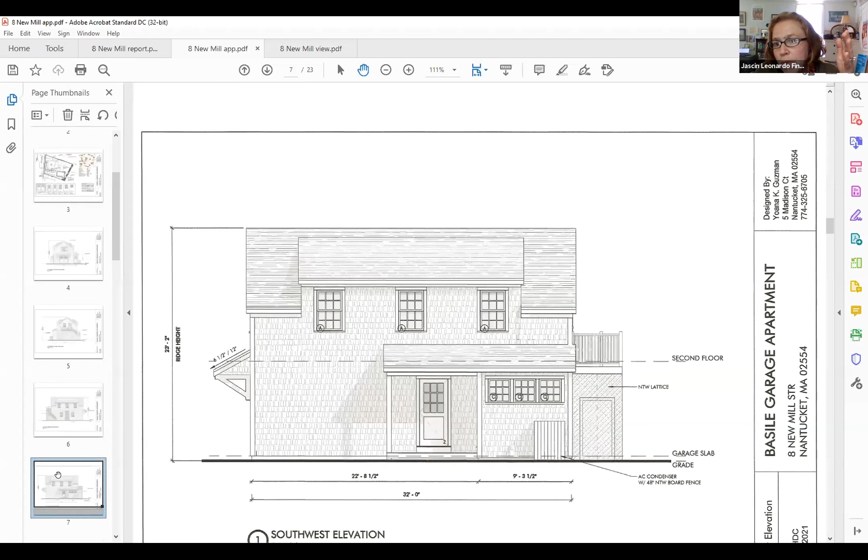So it just - I know it's just a drawing, but it looks plasticky. I'm sorry, I'm not doing a very good job in my comments today. It is fully visible from the street it's on, and fully visible from the street over. I'm there every day, and it doesn't matter if there's leaves on the trees or not.

It's fully visible. And there are some other appropriate barn-like structures in the neighborhood, secondary structures. There's one next to - I forgot what the house is called - it's next to the poorhouse going up with red trim, but that's a little chunky too when I think about it. I just think it could be a lot better because this is not going to be hiding. And I don't think the stairs on the outside are appropriate.

I don't even think that little bump out for the door on the right side, if you're looking at the northwest elevation, is appropriate. The dormer wings, I think it needs to be thinner, and it just doesn't look like it was once a barn or anything like that.

But I agree with some of the stuff you said, Mickey. Angus?

I think the exposed stair has always been an issue. The width, I think, is a good comment, because it starts to get confused between a garage and a second dwelling. You see the garage doors, but the mass of it...

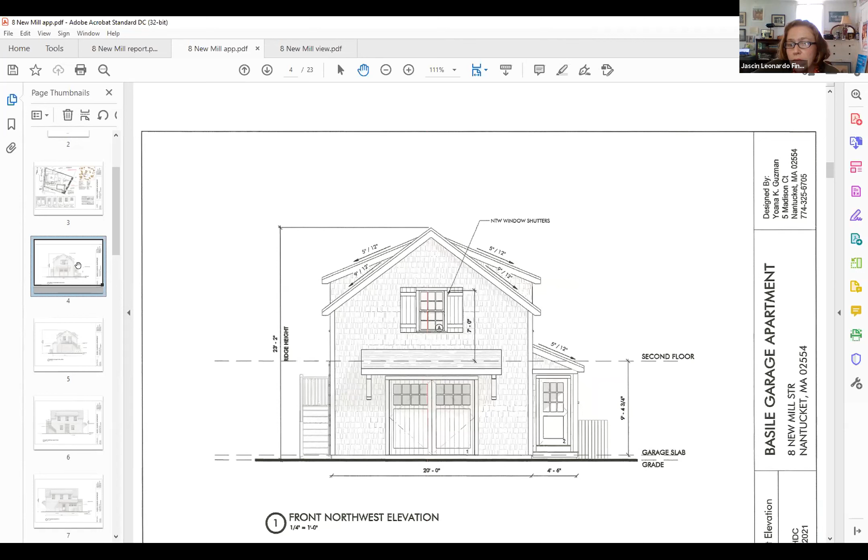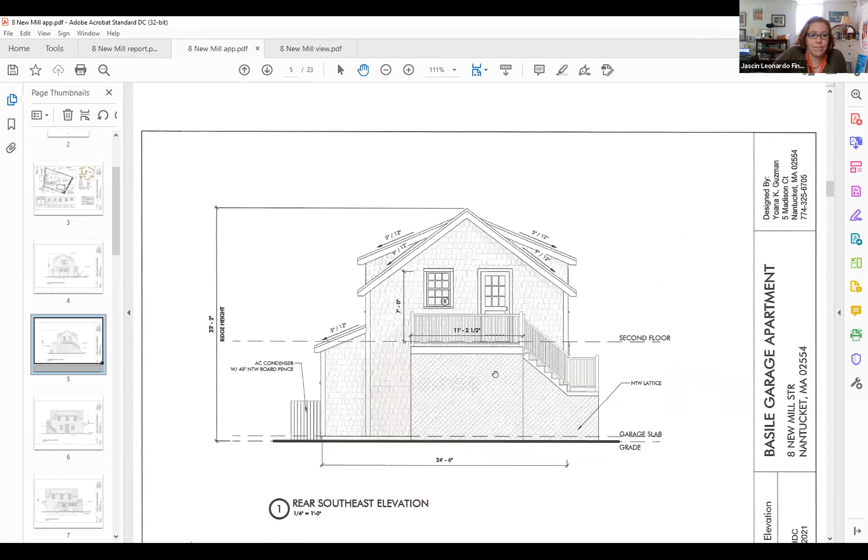Yeah, if it could just get reduced any in width and height, I think that would help. All that lattice and everything you see on the back, that's all visible from the street. The neighbors and everybody else are going to be looking right into that. And it's just beautiful, kind of still open, yards and things on the houses that back up against this.

So it is, again, fully visible, but I hate to say this is ruining the view. When you look at the site plan, Holly, could you click on that? Look at the proportions of this to the main house. It's really a pretty large building, relatively speaking.

I just know they can scale it down and it'll feel much better. They're asking for a lot here. I agree with that statement. It's a lot of building relative to what's there. It may even not meet the 20% rule based on what I'm looking at.

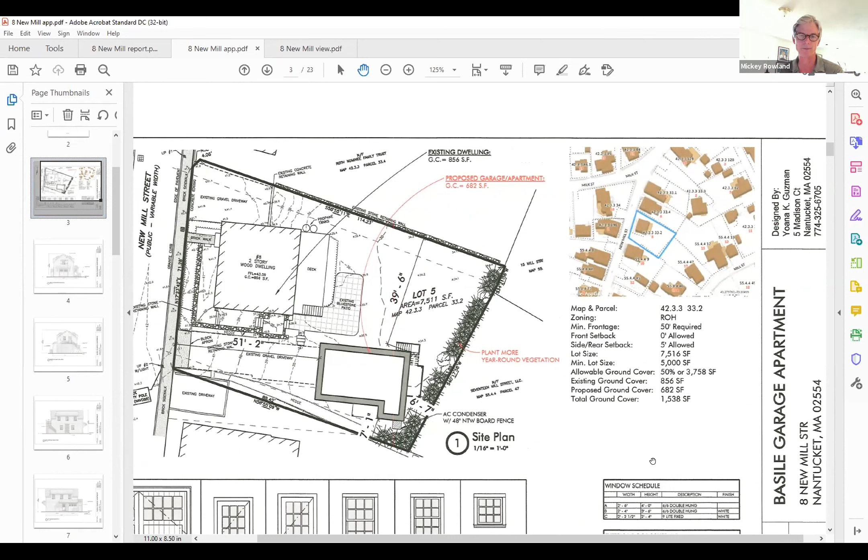I wonder too. Yeah, it's only 682 and 856, it's like 100 and something between them. It is a second dwelling. It's not a studio, so they'll have to meet that 20%. What is it, 682 divided by...

856. Holly, is there a picture of the main house again? It's just at 20%. Don't worry, I know it looks like myself, but I just...

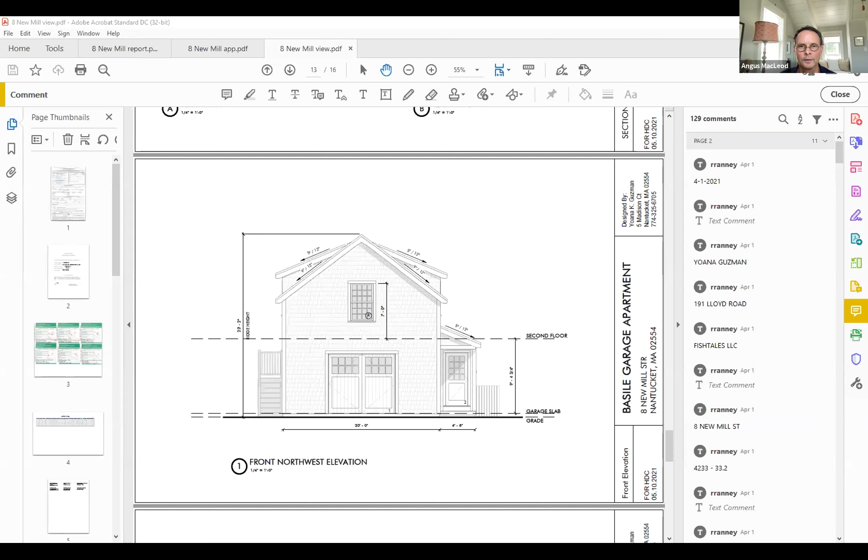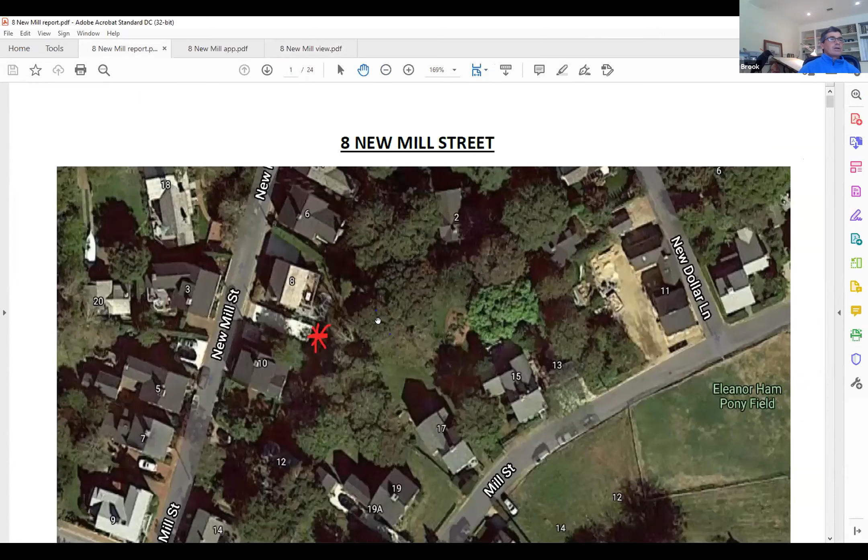Anything else on this one? Nope. In general, it looks like something that would be out of town. It doesn't look like a barn that was in town that was converted, and it doesn't look like a little guest house in town. It looks more suburban, something that wouldn't normally be in town. It would work on Evergreen Way,

or somewhere mid-island. What we're looking at now is the previous submission, I think, right Holly? Or do I have that wrong? Yeah, I almost like it, so I better... was looking for the better report, without the awning, but I agree it should be made narrower.

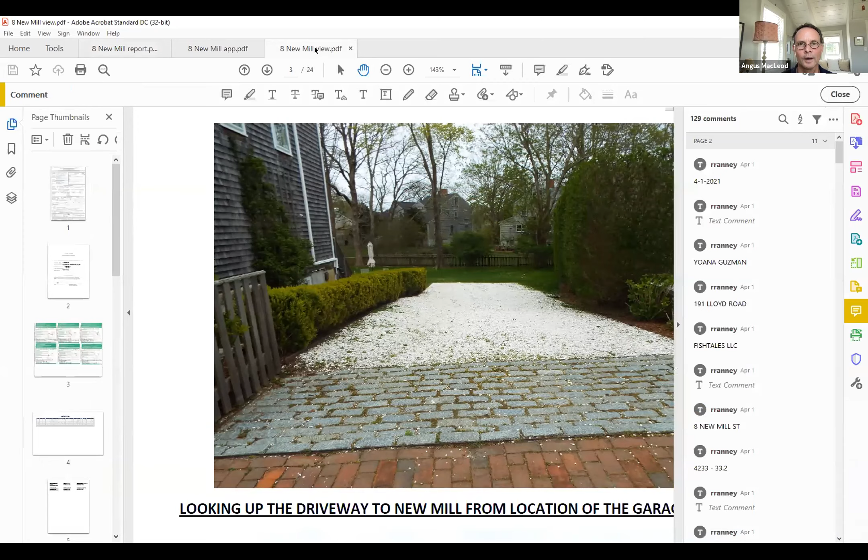There's a lot of abutters' concerns, and a lot of that was brought up. And of course, again, the HDC had to reiterate that that's not the purview, but here's a 1977 infill 4-bay that's there. I mean, it's going right here. I guess the issue is that it doesn't really go with the surroundings, and that's

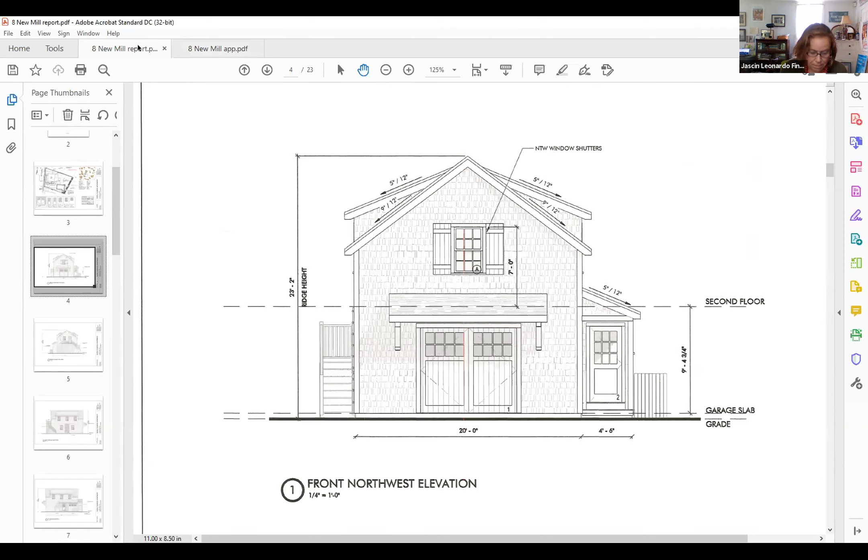the part that really doesn't work. Sort of what I meant by saying it looked plasticky. This doesn't look... Well, I don't know where the shutters came from, but the main house doesn't even have shutters. Yeah, I think at one point it did. Oh really? Okay. I think, but it's been fiddled with quite a few times.

All right, anything else on this one? I think we're good here.